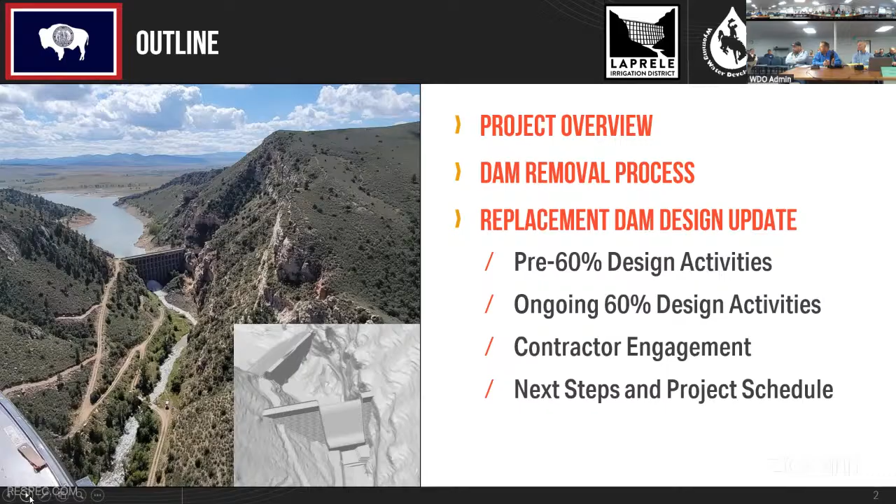For the overview, I hope everyone's aware we're talking about a reservoir just west of Douglas, just south of Ayres Natural Bridge Park, between Douglas and Casper. You can't see the reservoir from the interstate, but it's just inside that ridge south of the interstate as you travel from Douglas to Casper.

A little background on the dam for everyone's situational awareness: it's what's called an Ambursen-style slab and buttress dam. Construction was completed in 1909, so it's been around for a while. It's a large structure, with a crest height of about 135 feet, about 325 feet wide, and it stores 20,000 acre feet, which I think is the important number to remember as we talk about the replacement dam design.

It is a high hazard dam. In addition to potential significant infrastructure downstream, really the critical aspect is that there's a population at risk of about 500 people downstream of this dam. So safety is of the utmost concern when we're talking about the previous dam and as we design the new dam moving forward. It is a privately owned structure by the LaPrele Irrigation District, not a Bureau of Rec or other owned facility.

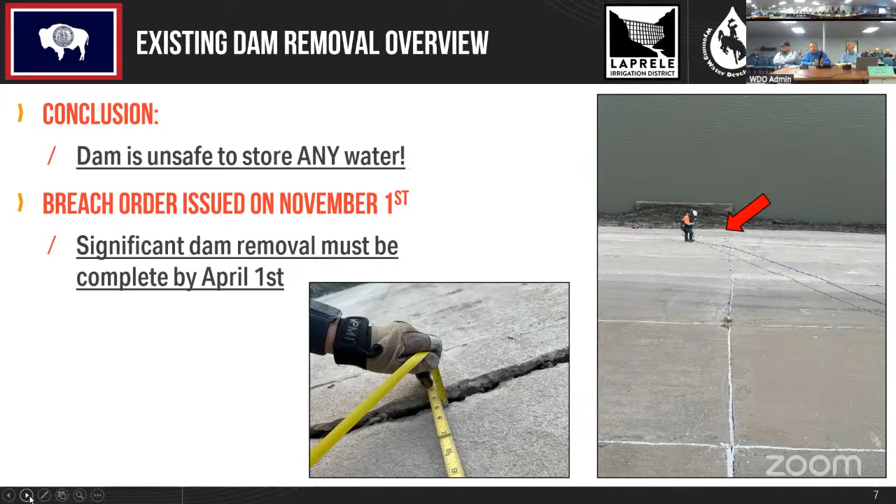That was then a lower elevation on the left half side of the dam to just route any high flows that overwhelm the outlet capacity through a channel over the existing structure. We left about 30 some feet of the existing dam in place, which corresponds to about the sediment level on the upstream side, because that was a concern to everybody - there is a tremendous amount of sediment in the existing reservoir.

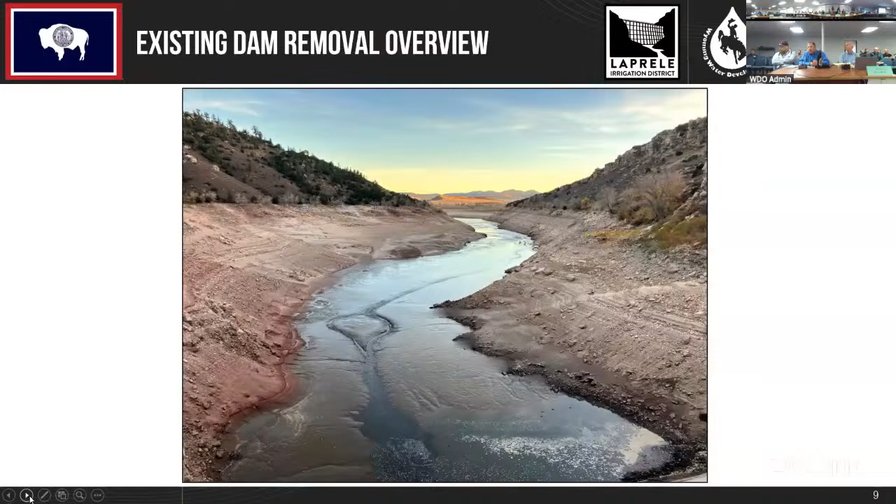It has been in place for over 100 years. So by leaving it at 30 feet, it left the amount of water on the upstream side of that structure at a minimum less than 50 acre feet. So it's not a regulated structure, but it gave us a plan and a path forward to keep the sediment in place as one of the primary goals.

Then we had to figure out who was going to remove the dam. In parallel with designing the removal process, we had to select a contractor. Ultimately, we selected a joint venture of Big Sky Civil Constructors and Montana Civil Contractors. Some of you may be aware of their work - they are currently the contractor building Leavitt Reservoir, another water development funded project. We signed the contract, the irrigation district signed that contract, I think about January 15th. So a lot of work happened between November 1st to get them on board mid-January.

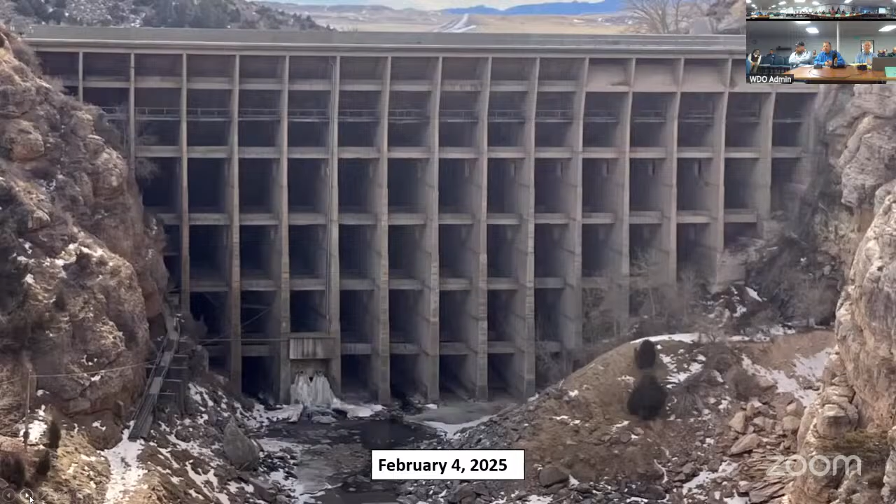We received the FONSI, finding of no significant impact, from the Bureau of Rec on January 31st. That was really the notice to proceed for the contractor to begin construction. So here's what the reservoir, the dam, looked like on February 4th, before they started any work - this is the original form with the kind of rubble pile there on the right.

Reached up with hydraulic shears and started chipping away on the buttresses. They also had jackhammer heads that they really used on the upstream slab, which was a lot stronger concrete than the 1909 concrete that was holding up the buttresses.

By February 23rd, in just a couple of weeks, they had removed enough of phase 1 to get to the upstream side of the dam, and that's where work really started to progress at a faster pace. They were not working from below the dam, but could be upstream and put downward pressure on that slab as they removed it. So the rest of my slides here are just a kind of time-lapse presentation where I'll show you the photo and the progress that's been made.

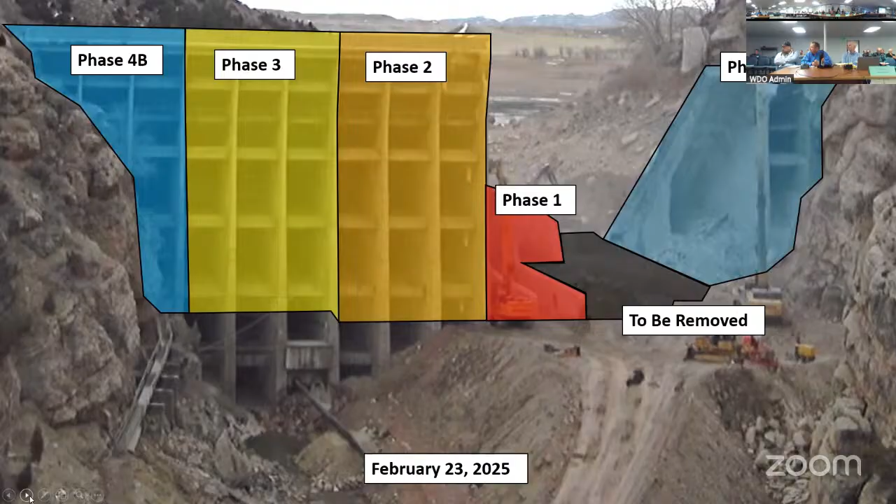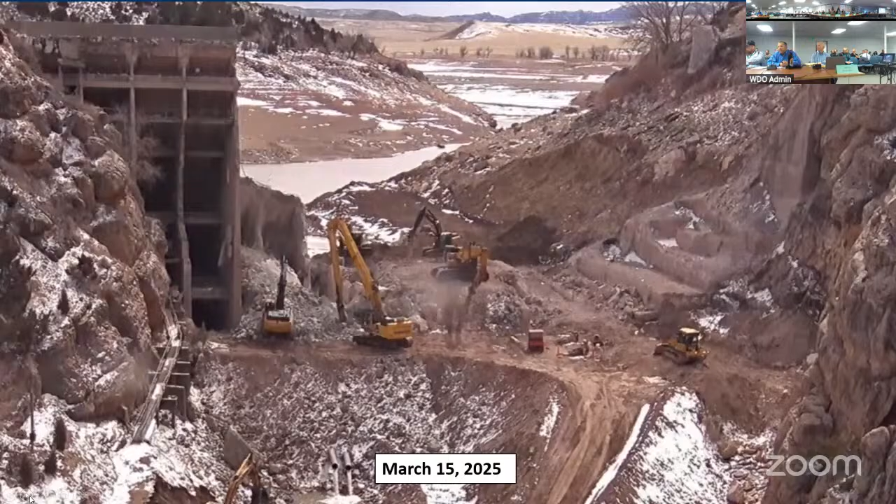March 15th, a couple of weeks before that April 1st due date. You can see they're continuing to move from left to right as you look downstream, into now they have started phase 3. And I should point out that things were going so well that while they were building their working pad across the downstream face of the dam, they went ahead and removed phase 4A, which is technically ahead of schedule, just to help their workflow.

At this point, they were down to final elevation. They just had to do the channel shaping, because the breach order said you had to be down to a certain elevation of removal for phases 1 and 2, but also required that the channel was shaped so you wouldn't be causing a lot of erosion or debris movement if a flood event occurred post April 1st. So by March 23rd, they really were focusing on the channel shaping.

And that's what the channel looks like now, through the existing structure, to route those larger flows in a way that has large enough cobble size that you won't get significant debris movement through that over the top of the remaining structure.

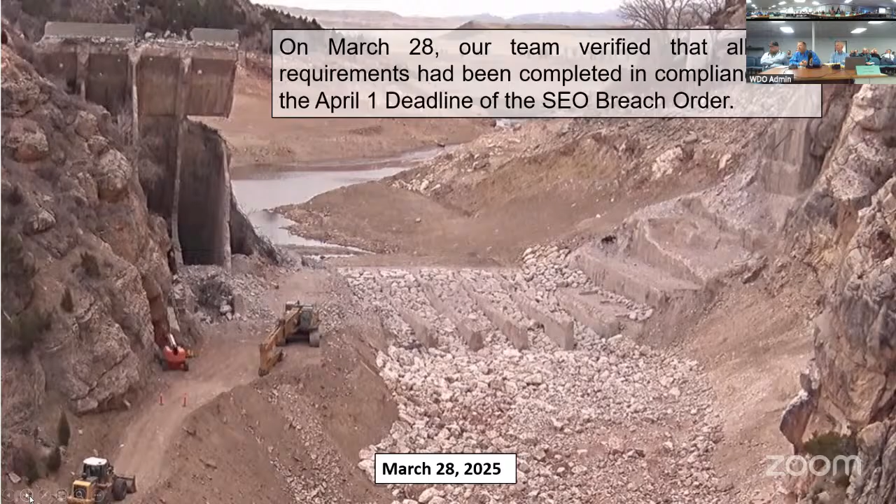So on March 28th, our team verified that all work requirements had been completed in compliance with the April 1st due date, that really the threat of a catastrophic dam failure had been removed.

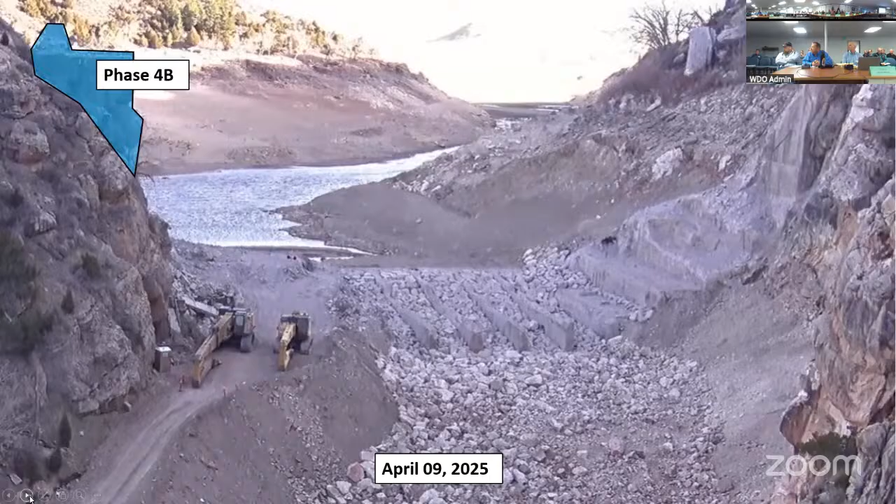By April 9th, then they're just cleaning up. At that point, they had just very little left of phase 4B right up in the corner. And that's what it looked like on April 28th. So at this point, construction has been essentially completed.

I think I have a little zoomed out photo there. You can see the existing outlet works have been buried. Those pipes have been extended and routed into the channel. As of today, all of the water going through LaPrele Creek are going through that existing outlet structure, and only higher flows would ever go up and over the spillway crest, now that we designed through that channel.

So on April 28th, our crews went out there and verified substantial completion for the contractor, and for all practical purposes, just a couple of little minor punch list items, cleaning up some remaining rebar that we were able to find around the site. But for all practical purposes, construction for the dam removal has been completed.

At this point, I'm going to switch to the new dam construction. Is there any questions on the dam removal process?

Chairman, I have a question with...

Dam removal. The new dam's going to sit in a different area, right? So you don't have to redo the structural integrity of the rock or anything.

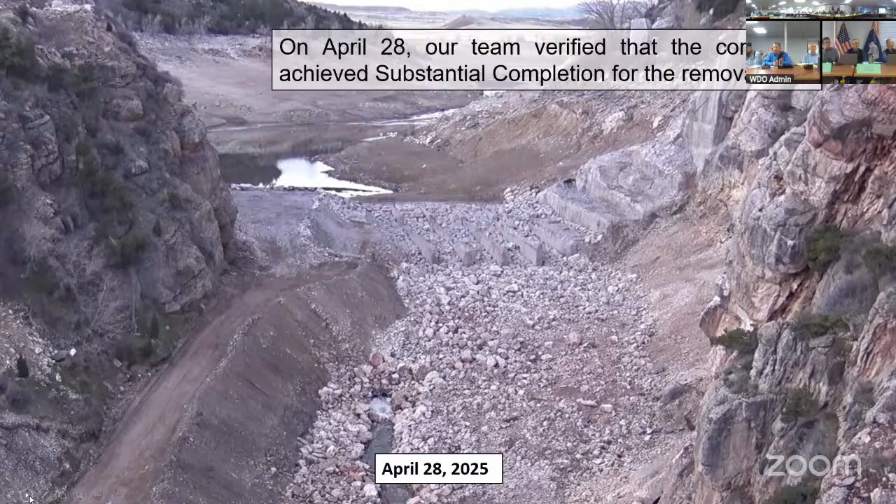Okay, thank you, Mr. Chairman. The replacement dam design update.

Just a quick overview of what we're trying to accomplish here. Remember, this replacement dam, as Commissioner Glick just asked about, will be immediately downstream of where the existing dam previously sat, as shown on the figure on the right. Obviously, it was a big change in our design and our plans for constructability that we'll no longer have, as shown here, the existing structure.

It's important to recognize that the new dam does not change the storage. The original dam was 20,000 acre feet. The new dam will be designed to hold 20,000 acre feet as well, and it is a sizable structure.

This dam was higher than the other one, 165 feet high at the top elevation, because modern dam safety standards say it has to meet and be able to pass the PMF, the probable maximum flood. And so that leads to an uncontrolled spillway width much larger than the spillway of the previous structure, 160 feet wide, as we follow best practices and the industry standard of care in designing the new structure moving forward.

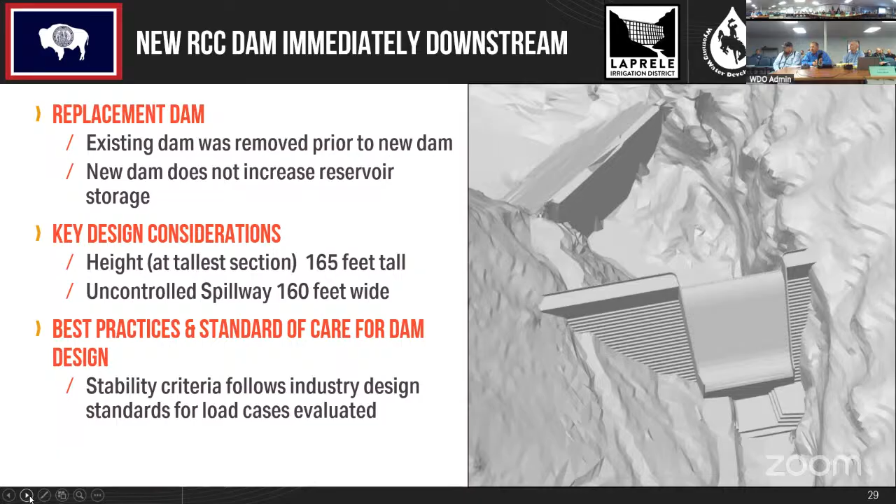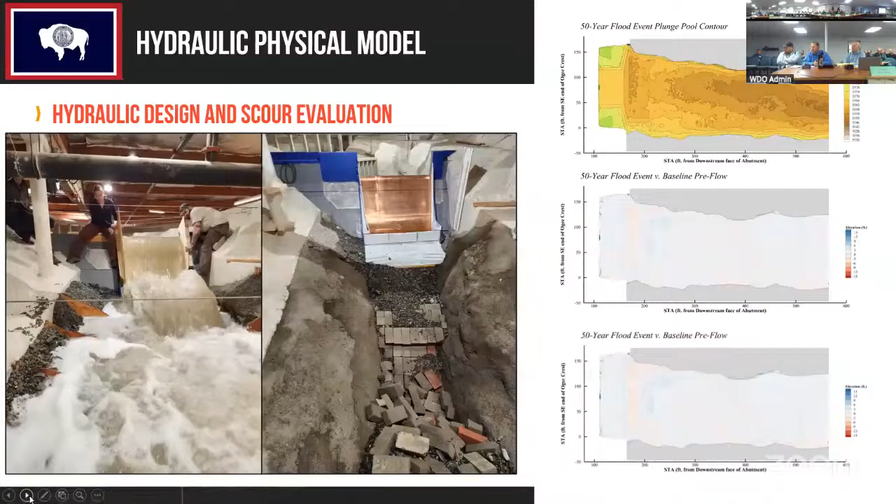We also, if you remember, created a physical model for the hydraulic design to design a flip bucket spillway and to evaluate scour potential downstream of the new dam with that flip bucket spillway, that's the figure on the right. That, along with structural modeling, really led us to the 30% design package that was submitted for review to the State Engineer's Office, Water Development Office, and others in 2024. That 30% design included the hydraulic modeling results, structural modeling, geotechnical foundation design, access roads, and the material sourcing at a 30% level.

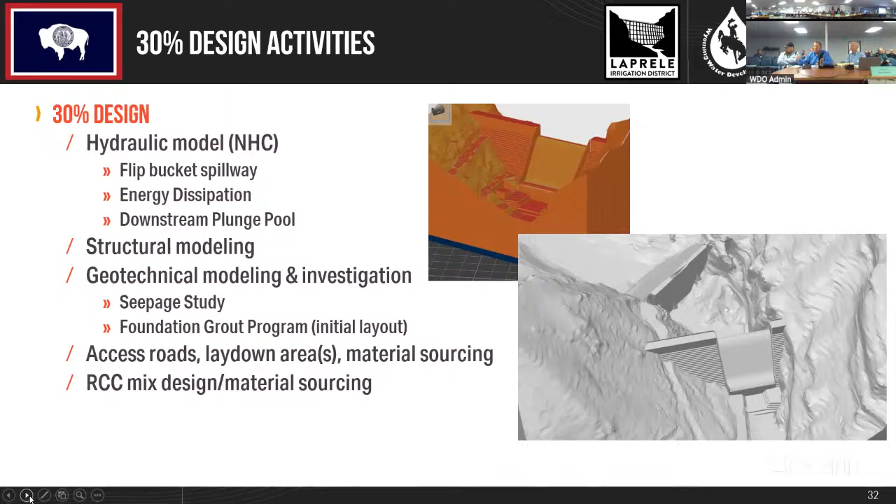So what we're really working on now is just advancing each one of these areas up to 60% and beyond. Very similar to the last slide, what are we working on today?

A lot of work has been done in recent months to advance the 60% design and create an interim design package that we submitted to the contractor, which I'll talk about in just a moment. The 60% design for geotechnical has really been essentially completed. On the screen here, I'm showing the excavation objective. It doesn't show very well, but we have the final surface, close to the final surface, of how much material has to be removed to build a new dam.

We're currently building the three-dimensional finite element model of the dam. That's the final level of structural modeling for stability and sliding potential, and we're engaged in active conversations around the outlet works, what valves to use, how they're configured, our power requirements, and so forth. We're also advancing the access road and mix design aspects of the dam.

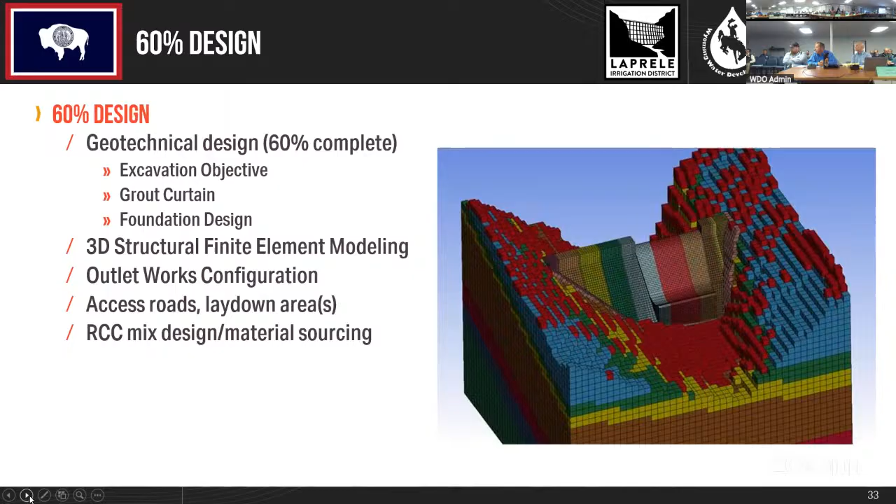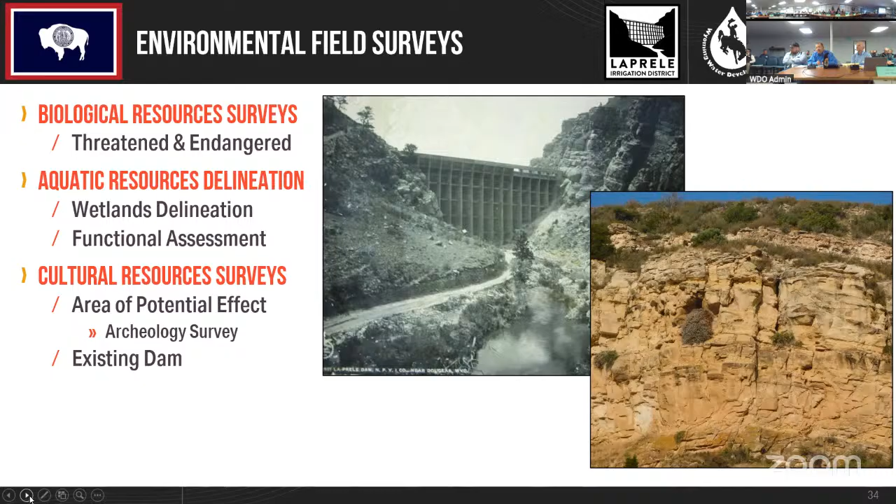The other thing not to lose sight of is there is an environmental process. The Bureau of Reclamation is the lead federal agency for this. In previous years, we've done considerable work, and believe we've completed almost all of the environmental field surveys, biological, aquatic resources, and cultural resources surveys to inform the environmental assessment document.

Prior to the dam removal, we had initiated the formal NEPA process with the Bureau of Rec, including monthly agency coordination meetings with them, the Corps of Engineers, DEQ, and others. Agency scoping letters had been sent, and the scoping process was complete prior to November of last year. The cultural report was submitted to SHPO, and we worked with them to decide whether to do a programmatic agreement or a memorandum of understanding. So we were working through all of those details, and working on the impact assessment, really writing and starting the environmental assessment document.

A lot of that got put on hold because we had to write a brand new environmental assessment for the dam removal. So we've reinitiated this process, and I'll talk more about that in just a minute.

One of the key activities of the new year, once we got the dam removal process underway, was that we had chosen to deliver this project with the CMAR project delivery method. CMAR is a collaborative project delivery method where the contractor is selected during the design phase.

So we initiated and went through that process earlier this year, and I believe signed a contract on April 7th. The reason you do this is because it gives you better informed early cost and schedule understanding working with that contractor. It's not just the engineer making estimates and guesses on what the contractor will bid and what their schedule will look like. We're actually working collaboratively with them to negotiate a guaranteed maximum price prior to completion of final design.

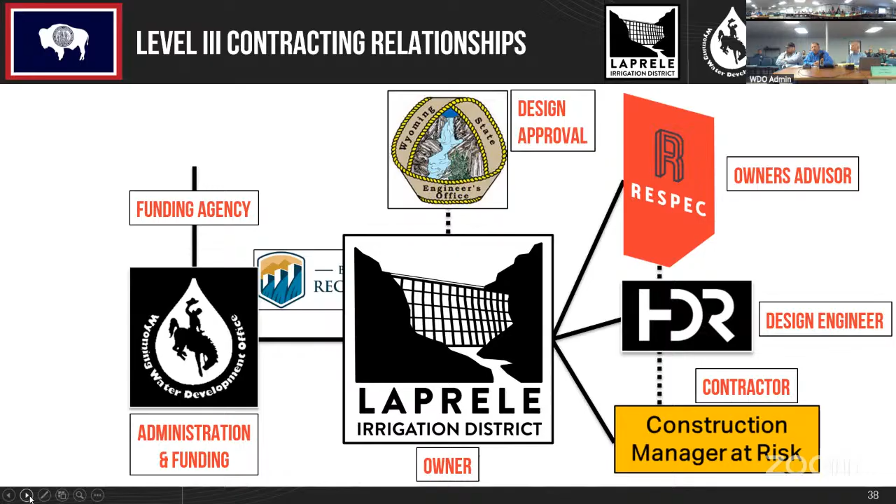As I already alluded to, earlier this month we selected the joint venture of Big Sky Civil and Montana Civil to be the CMAR moving forward. They are the ones that just recently completed the dam removal process, and are the same team currently building Leavitt Reservoir. They were absolutely outstanding to work with during the removal process, with a collaborative team that was easy for all of us to engage with on the design project. They came to us with an incredible proposal for their thoughts and plan for constructing the new dam. The Irrigation District made that decision in early March, and ultimately executed the contract on April 7th.

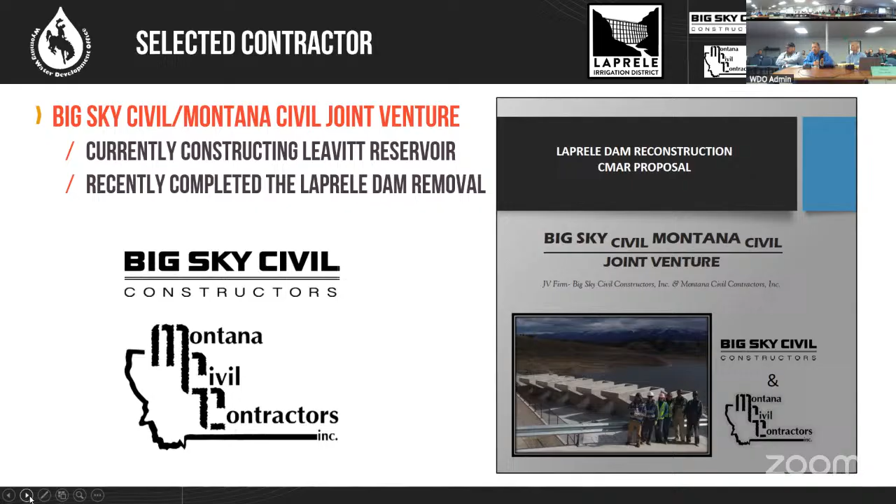Since April 7th, we got right to work with them. Candidly, their familiarity with the project meant they were able to get to work literally on day one. Honestly, they started working even before that, already creating their plan. By the time April 7th came, we were well underway with moving forward with this collaborative project delivery.

We started with the pre-award meeting in Douglas, introducing everybody to the team and setting goals for how we're going to work together. Then we had a design kickoff project meeting with the CMAR in Denver, which translated right into a design workshop for 3 days. Water Development, the State Engineer's Office, and others all participated in this workshop that happened in mid-April, really to start advancing the design with contractor input.

So what are the next steps and where are we at today? Well, one of the key first steps for the CMAR is to develop their first cut at the opinion of probable cost. They've already started that process and delivered a draft work breakdown structure of their construction process, which they submitted to us in draft form yesterday. We had a meeting reviewing that earlier today while I was driving down here. That will transition into their construction schedule and ultimately the construction sequencing, going right into their first cost estimate, which we expect sometime in June.

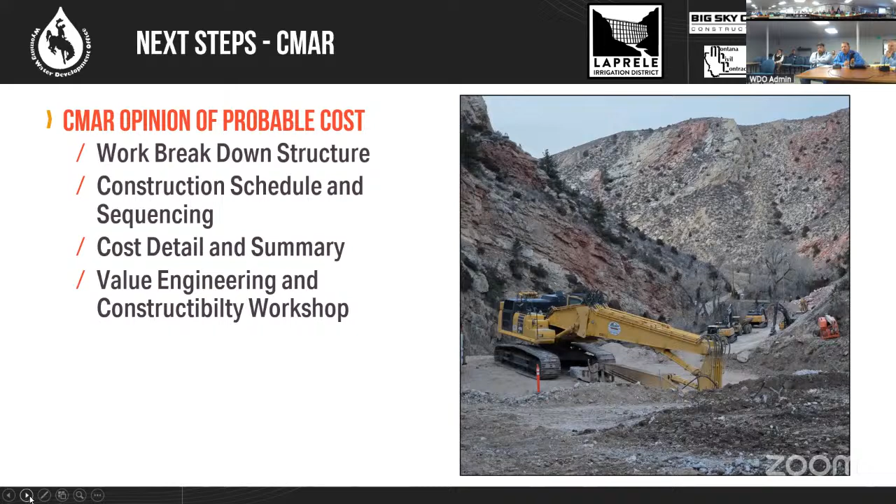We'll take that cost estimate and meet again in Denver in late August, early September to do another design workshop and a value engineering workshop. What do we like? What do we not like? What opportunities are there for cost savings? That will happen, like I said, in a couple months.

But more important, and probably the critical path item for this project right now, is the NEPA process. It went on hold with the dam removal, and we had to shift gears and do a whole separate environmental assessment document for the Bureau of Rec. Field work has already been completed. As I said, there might be a little bit of change now that we have CMAR input on where they want to put their conventional concrete batch plant.

But essentially, scoping has been completed. We are finalizing today the impact analysis and getting ready to submit an EA document, hopefully later this month, to the Bureau of Reclamation, which starts about a 4-month window with public comment and agency review, two different agency review periods in there. We're targeting and hoping to have a FONSI sometime late September, early October to be able to do early work packages if so desired for the contractor, and if it helps advance the construction schedule.

So that was really step one for the contractor. They had to give us their plan for construction so we had all of the impacts properly described in the environmental assessment document. So that's what we're working on right now.

In conjunction with this, we are continuing to work on right-of-way and securing easements. We're well ahead of that process. There are really two access options for the dam: coming through the existing access to the dam from the north, where all of the easements have been secured, and we're currently working and communicating with landowners to come in from the south, which is our plan for delivering aggregate to the roller compacted concrete batch plant.

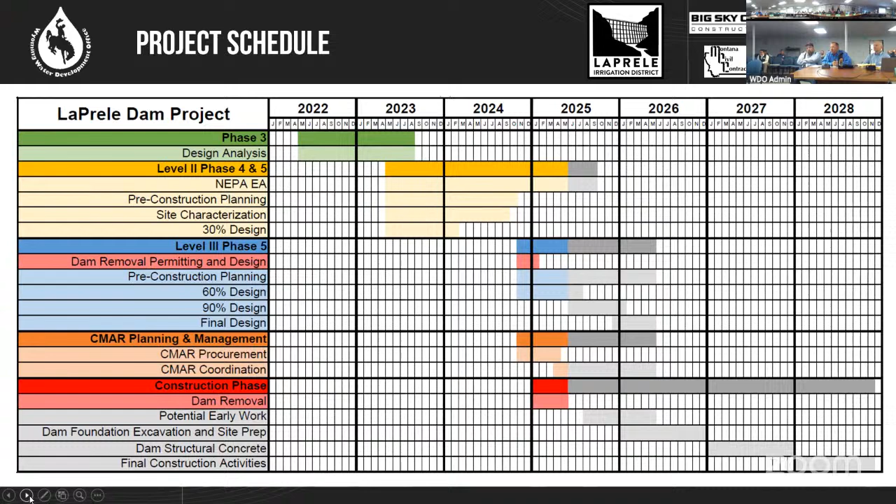And with that, I'd take any questions.

Have questions for Corey or Casey? John? David, can I talk through this computer?

So, can you hear me? Let me try this. I can't. Sorry, I don't remember this room being so small. Can you hear me now?

The question I've got is will the dam capacity be back to what it was in 1909, compensating for the capacity you've lost because of sediment, I presume?

Mr. Chairman, Representative Eklund, we're designing the new dam to account for any loss from sedimentation. We did a new bathymetric survey of the reservoir two or three years ago, and that is the basis of our volume calculation. So we are designing the new dam to be right at 20,000 acre feet, again to account for any lost storage through sedimentation in the past.

Okay, that's what the original reservoir was. Okay, thank you.

So I guess our overall agenda here: do a little bit of project background. I know some of you are pretty aware of our project, but for some of the newer people, we'll do a little project background, project overview, cost and schedule, and then of course question and answer.

First of all, project background. Goshen Irrigation District diverts water from Whalen Diversion off the North Platte River, about 4 miles from Guernsey. We have 3 major siphons on our system that our whole canal runs through. We have some other open canal laterals, about 3 major canal laterals that are about 60 miles long. Our main canal is 85 miles from Whalen Diversion to the state line of Nebraska, where we are responsible for delivering water to Gering-Fort Laramie Irrigation District. So they're a stakeholder in this as well.

And of course, we have 2 half-mile long tunnels in our district. Tunnel 2 is the one that had the collapse and failure. There's also a mile-long tunnel in Nebraska on the Gering-Fort Laramie Canal.

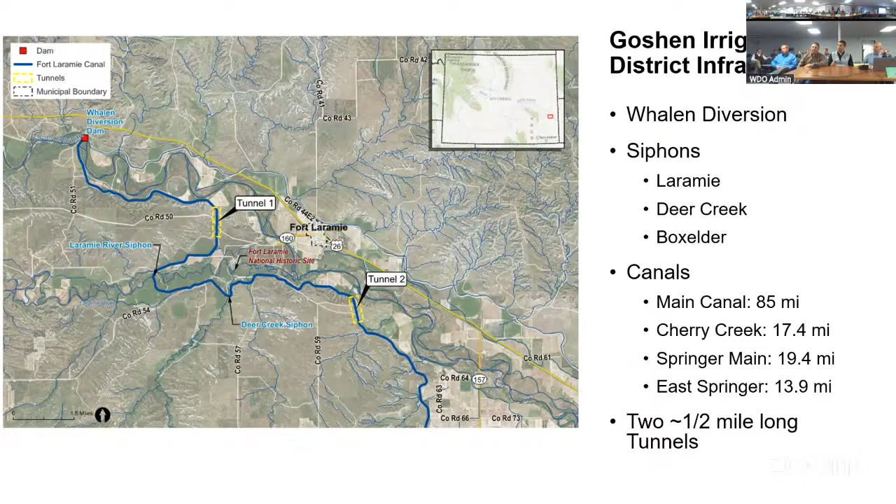When the collapse happened, July 17, 2019, in the middle of the night, we have SCADA nearby that alarmed us that the canal had a high level, and then not too long after that, an alarm that said we had a low level in our canal, so we knew that the canal was probably breached. We called personnel up right away. We were on scene within about 45 minutes to an hour, which is about how long it takes to get up to Whalen and the Tunnel 2 area. But we had shut water off by 3 a.m. when we realized there was a collapse and a breach in the canal. So pretty short period of time to get things shut down.

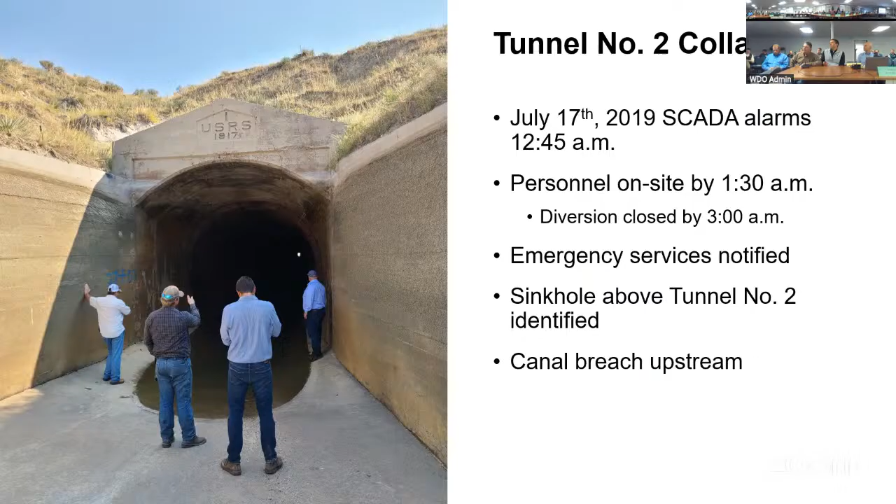We were running not full capacity, but a pretty full canal at that point, so it took a little while for the water to drain out. We notified emergency services of what happened, and found out that we had a large sinkhole above Tunnel 2. So we realized that the tunnel had indeed collapsed.

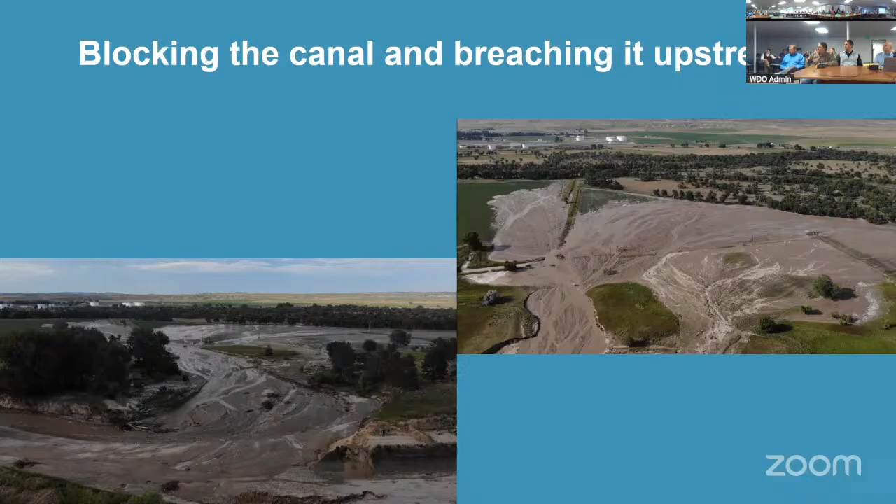Here's kind of what we did with the tunnel collapse to get it mitigated and back into use. Engineers looked at the tunnels and found spots of concern. Where the collapse was, once we got the dirt out of the way, we installed 6-inch steel beams to help support the tunnel. This took roughly 6 weeks to fix the canal collapse before we were able to restore water.

The University of Nebraska and University of Wyoming did a joint economic impact study and came up with a $90 million impact of the crop damages that those 6 weeks without water caused. We were then able to restore water in August and ran for the rest of the season.

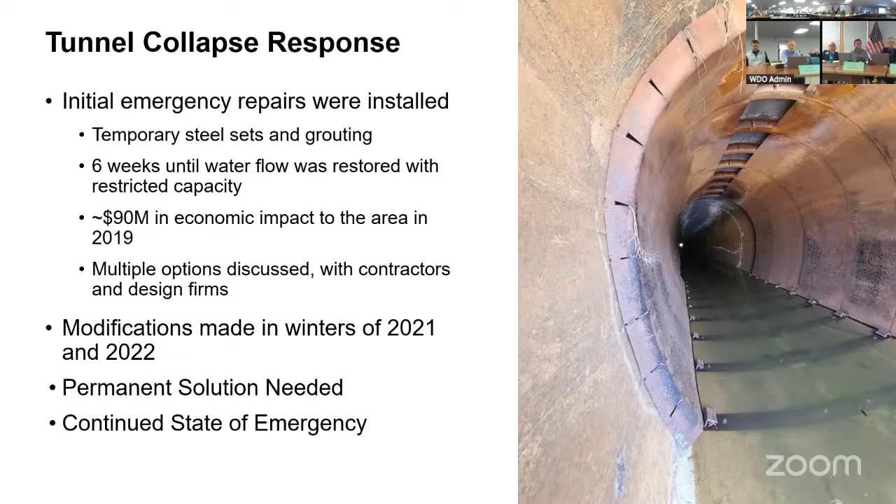Then we started working on what our permanent solution for this would be. This was always just, we say, a Band-Aid fix. We still feel it's an emergency - those steel sets are taking on load, and we still aren't able to deliver at full capacity. So our urgency is still there to get this project completed. I think with that, I will turn it over to Marcus.

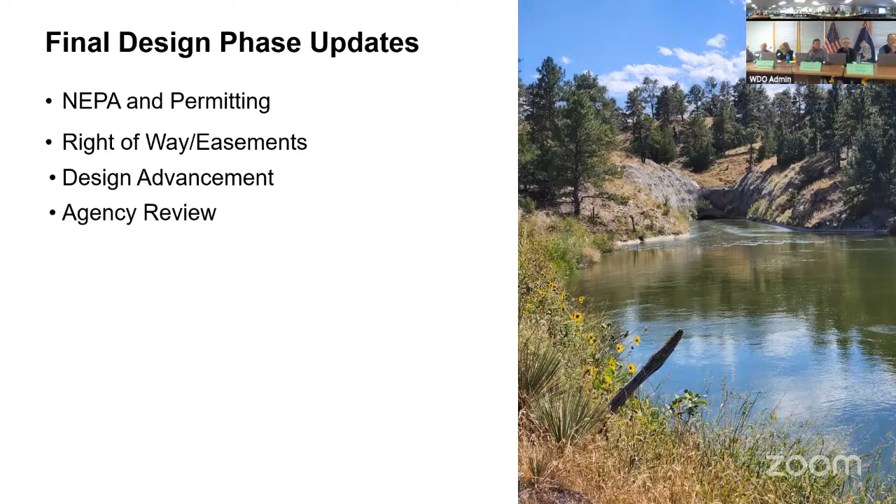For those who may not be aware, NEPA is the National Environmental Policy Act. It's required anytime there's a federal nexus, which we have here because the Bureau of Reclamation owns these tunnels. They acted as lead agency for the NEPA, which was an environmental assessment that's been through draft phase and public comment. We've addressed those comments and sent back what we believe is a final compliant document to Reclamation. We were hopeful that bullet would be a checkbox today instead, because we feel any day now, based on email correspondence with Reclamation, we anticipate a FONSI, but haven't seen it yet.

The BLM is also involved as a cooperating agency. We're hopeful, though we obviously don't speak for them, but they've been involved in the process, and we anticipate their FONSI would follow closely behind Reclamation's.

Regarding project right-of-way, a lot of great progress has been made. All private right-of-way needed for construction has been secured, and we've also secured a significant amount of state land for temporary staging and easements. The BLM lands, knock on wood, we anticipate would be granted following issuance of their FONSI.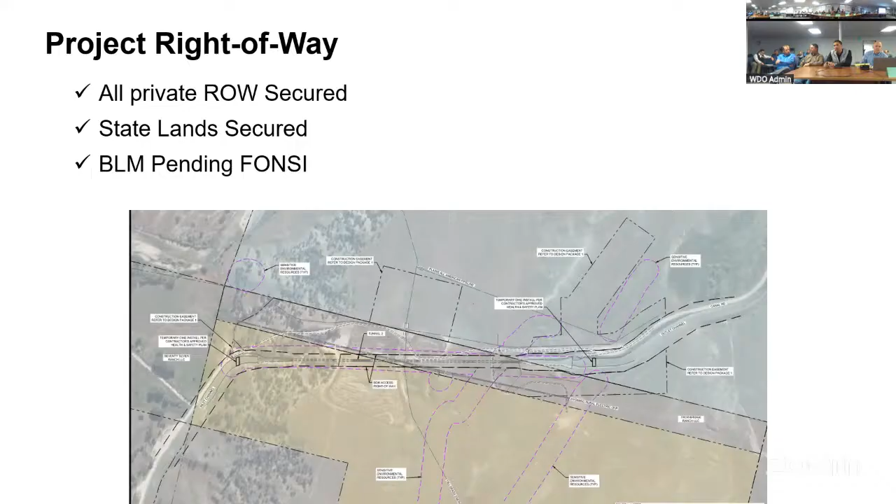A quick overview of the CMAR process mentioned during the last presentation: construction manager at risk really means early contractor involvement, and that's the delivery model used here for Goshen. The CMAR for this project is Atkinson Construction, a tunneling contractor.

So what is our approach to rehabbing this tunnel? Through value engineering work in collaboration with the CMAR, the methodology has changed some. I believe we presented this in November, but we have more detail now. What we're proposing involves use of an open face tunnel boring machine, which we call a digger shield. That machine is cylindrical, and would ride on the existing tunnel inverts, completely removing the tunnel crown and sides, making this a full rehabilitation of the tunnel.

We think this has real advantages for this type of ground, because the excavation and personnel operations are fully enclosed, and the ground is supported as you advance. Previous pictures showed history's tendency for running ground here. Since then, a lot of grout has been injected into the tunnels, and we'll inject more before this operation takes place. But the digger shield really helps mitigate those ground risks. It's also a high quality product, since the tunnel assembled behind it uses precast concrete segments joined together, fastened, and grouted into place. Because of that, we're able to procure those segments in advance, getting a high quality concrete product cast in a controlled environment, with grade control, and ultimately satisfied hydraulic capacity.

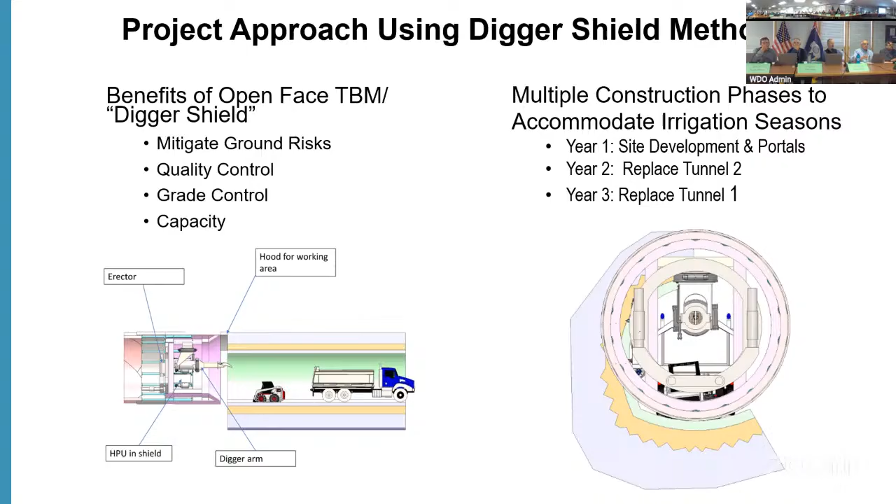Just a little bit more on the site work here. Some minor road improvements would be needed to bring in this equipment, just typical construction preparation, staging areas and such. The portals again would be reconfigured to launch and receive the machines, and we need to bring site power down.

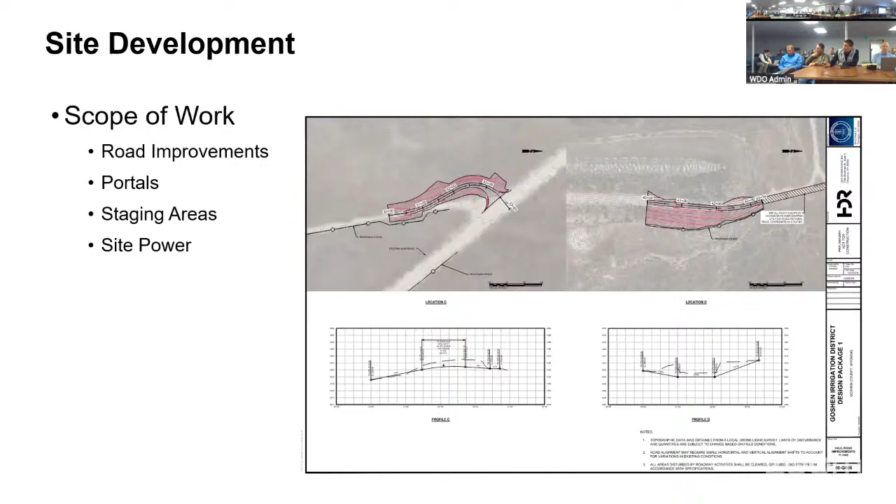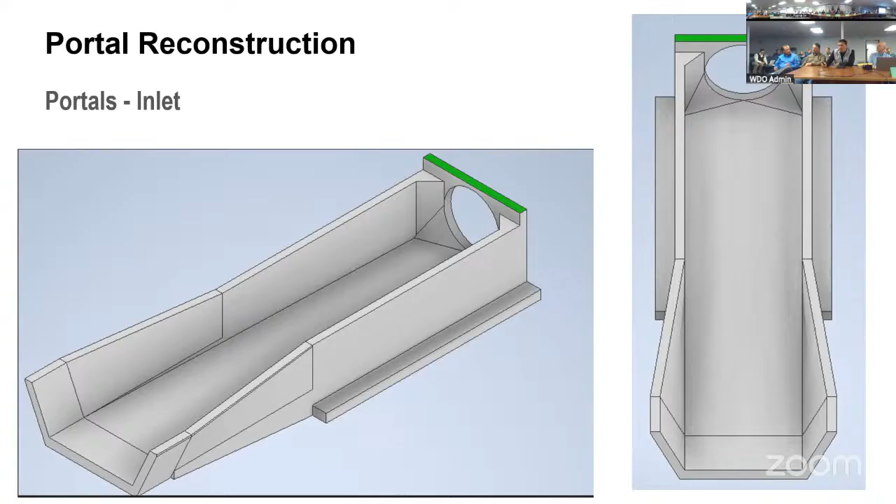Just some more renderings here showing the inlet side. For value engineering, we want to limit the scope of that to what's necessary and needed to facilitate the rehabilitation of the tunnels.

Now the outlet. The big question obviously is on size, what is the diameter? Just wanted to communicate that here. The existing tunnels are a modified horseshoe shape. They would be replaced with a circular shape, an 18-foot internal diameter, so there would be adequate capacity. That would be set on the existing invert, so there's a slight invert rise for the flow line of the tunnel.

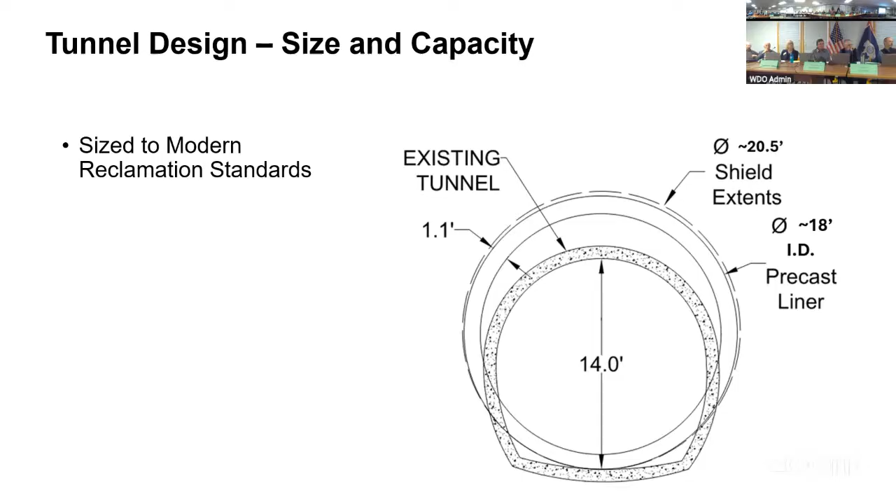Just a little bit more of the activity is shown here in this schematic of what we'd anticipate. The digger shield will advance, and the working face there is removing the tunnel. I don't think that's fully to scale.

We don't anticipate tandem trucks in there, but we do have a nice advantage in that we can muck material out the front of the tunnel, and that's going to help with production rates. Obviously, a lot of tunneling doesn't have that luxury — you're mining into virgin ground, you've got to muck material behind you and bring in your new tunnel. So here we have that benefit that should help with production rates.

And again, we have to do this in the off season of irrigation. We recognize fully that impacting water deliveries is not an option, and so that should help with that.

The backup decks and some of that erector equipment on the back end, that's the trailing end. The machine jacks off of the segments that were installed and erects new segments behind it. There's either a telescoping or a temporary support system, working with the manufacturer, the likely manufacturer, on that right now. As the ground is mined out, those temporary supports can be advanced even further in advance of the tunnel, always doing what we can to mitigate those risks.

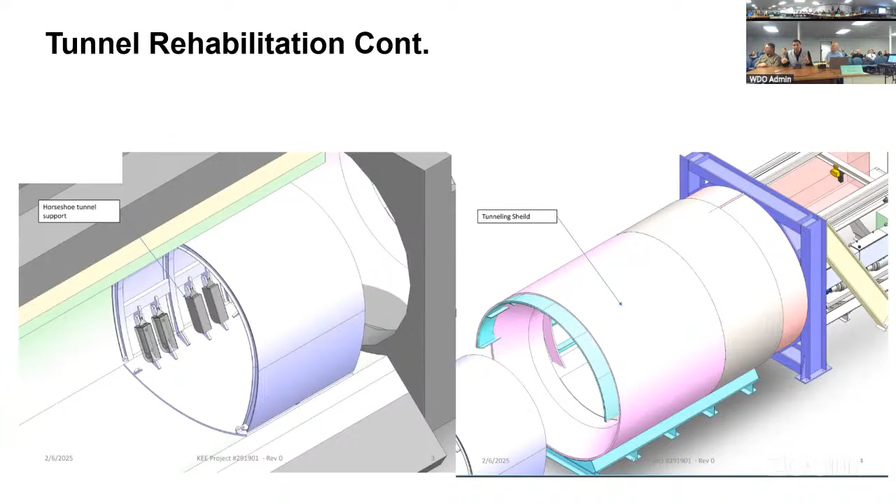Just another schematic view, more than schematic, of the digger shield. These pictures are examples — they are not the digger shield for Goshen, but give you a good life-size view of what these machines look like. The different tooling I would call to your attention on the front end: that working tooling can be that road header type, you can grind through rock and different materials, or you can fit that with a bucket, potentially changing those out as you go to match the ground.

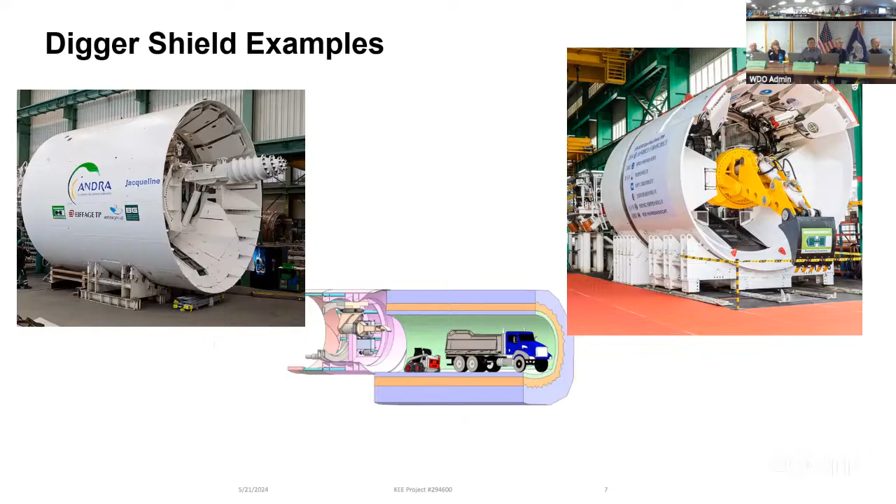A little bit more on the proposed schedule. The GMP proposal will be given to the boards at their next meeting here in May. From there it's the board's decision, potentially to execute in June. What we want to do is put the boards in a position where they can decide to either start procuring some materials or not.

This summer's got a lot of big decisions ahead of us. We're going to work through the office and make sure we're making smart choices there, but some of this equipment's going to take some time. Really, if we're going to meet the construction schedule for the tunnels, we're looking at a year lead time for some of these segments and the machines. So those decision points are coming soon. We want to have the NEPA right-of-way and the costs understood in order to allow smart decisions to be made.

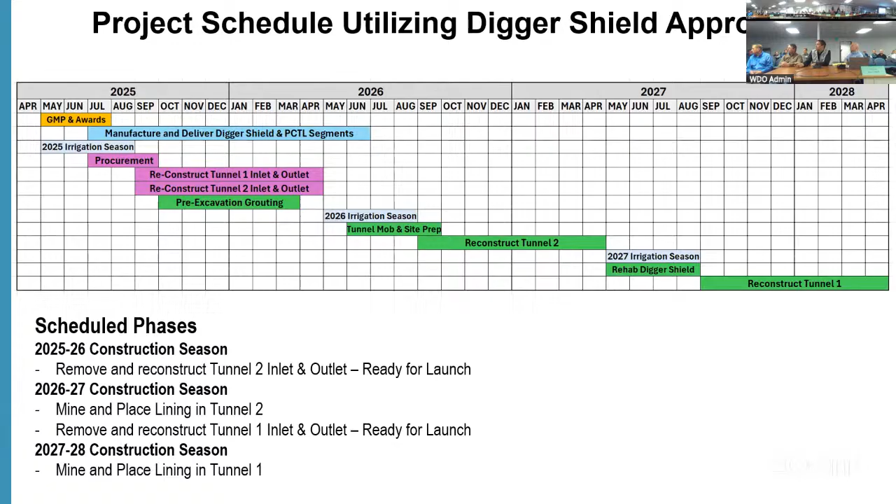Because this is a reclamation-owned facility, in order for the districts to have the opportunity to draw upon a potential loan from reclamation, we had to go through what's called their directives and standards process. We plan to have that buttoned up in time for construction. Ultimately it's required. So what we've already been through is value planning and engineering. We're resolving what they call their design, estimating, and construction process, or DEC, and the 90% review process will need to be addressed here shortly as well.

As Marcus mentioned, we are working with the CMAR, the contractor for this, and expect to have an updated cost estimate and a full GMP proposal next week at the board. So everything I talk about is a little bit speculative based on the work and interactions we've had with them for the last several months, but we're getting closer, so nothing is exact. We don't have final answers. We'll know more after next week's board meeting.

We've been working with them now for about a year. We got an initial cost estimate from them in November, and we got what we're referring to here as the current cost estimate from them in January. The first current proposed estimate from them, the first proposed GMP so to speak, came in higher than what we had anticipated or expected, at about $130 million.

So we've been working with them leading up to next week's submission of their next proposal to try to identify if there are any potential cost savings. I believe we've successfully worked with them through a value engineering process to find some things: removing the risk from potential subcontracting requirements of them not being able to self-perform critical aspects of the work, really focusing on who's going to do the work, working on the construction scheduling. We believe that's going to lead to about a $10 million cost savings.

We're going to try to work with local contractors and bid out the portal work and the site work outside of the tunnels. We believe that will lead to potential cost savings on the order of, we hope, about $5 million. So there's a potential cost savings there.

Any questions? Any questions? Mr. Chairman, Dan Larson here. Yes, Dan, thank you.

Obviously we can all see that Nebraska has a bit of a shortfall if they're trying to match the 51%, or whatever, 49%. So is Nebraska talking about upping that, or what's up?

Yes, Mr. Chairman. Currently the Nebraska state legislature is in session, and they've been meeting with them regularly, and so far the answer has been no. Nebraska is carrying a deficit in their budget right now, so they aren't too willing to give out any more grant money.

But they have been talking with the Bureau of Reclamation about whether we need to utilize all of our 49% of that XM loan, or if maybe they could take on more of that loan or increase the loan amount. So that's kind of where we're at right now. Nebraska's stance, I'm told, is that if they don't have enough money for both tunnels, then we just do one tunnel and look for further funding and go from there. Unfortunately that would delay things even longer, but that's where they're at right now, from what I know.

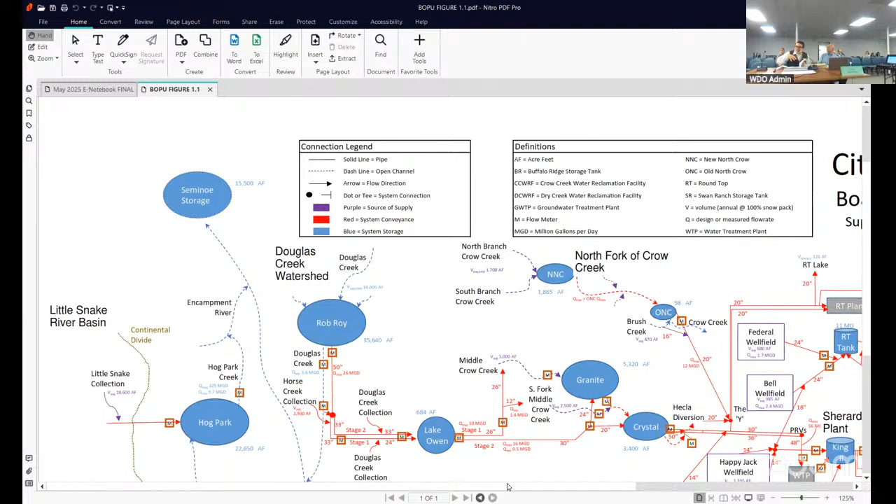This is a pretty good diagram to capture that, starting on the left side of the page. Generally speaking, the western side of the Cheyenne system, you see the little snake diversions. It talks about and depicts how those water transfers occur across the basin, how that's accounted for in Rob Roy, transfers across the Laramie Basin, and then shows up in Granite and Crystal reservoirs.

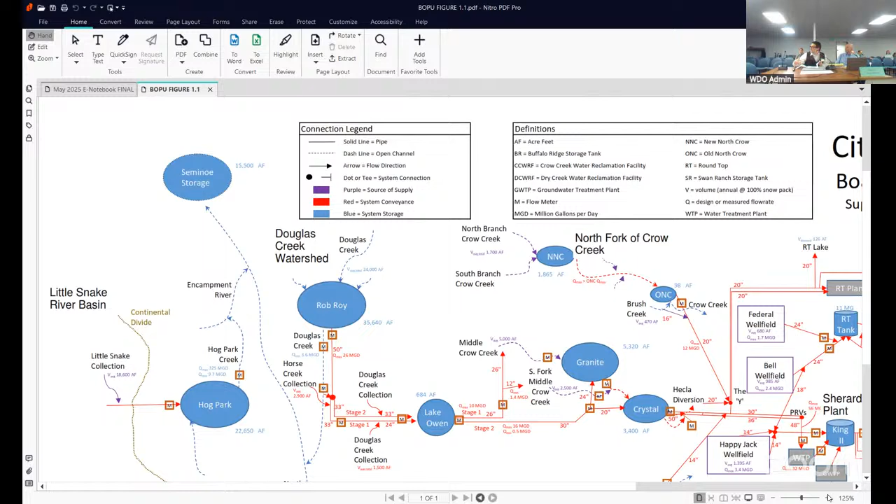For our discussion today, the series of depictions on the following pages will be focusing on that Crystal Reservoir area. In particular, we'll be looking at the area between Crystal Reservoir and what's called the Sherard Plant on figure 1-1.

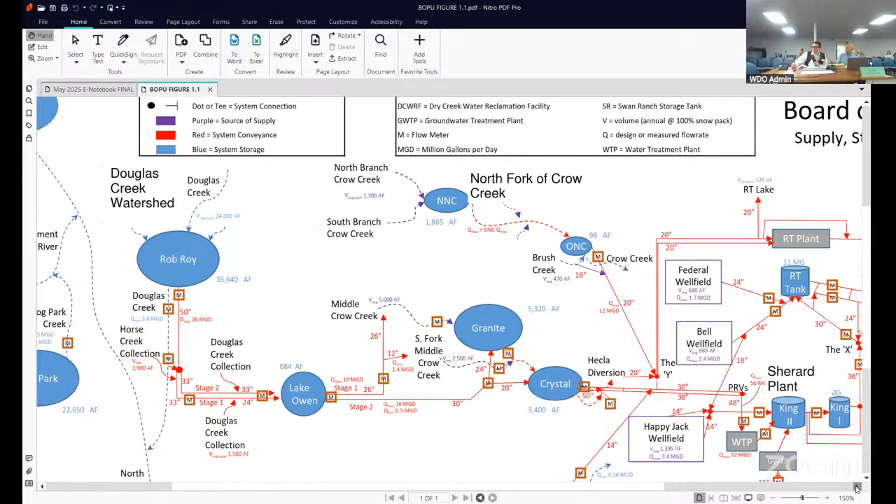Obviously there are more details downstream of Sherard, but when we get to the ultimate project proposal, it's really going to be right downstream of Crystal. So the details of the infrastructure downstream from there are probably not particularly relevant.

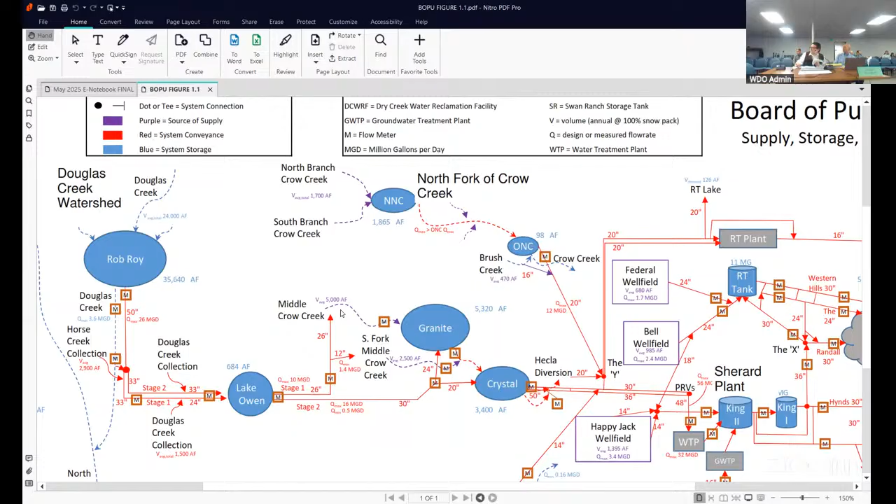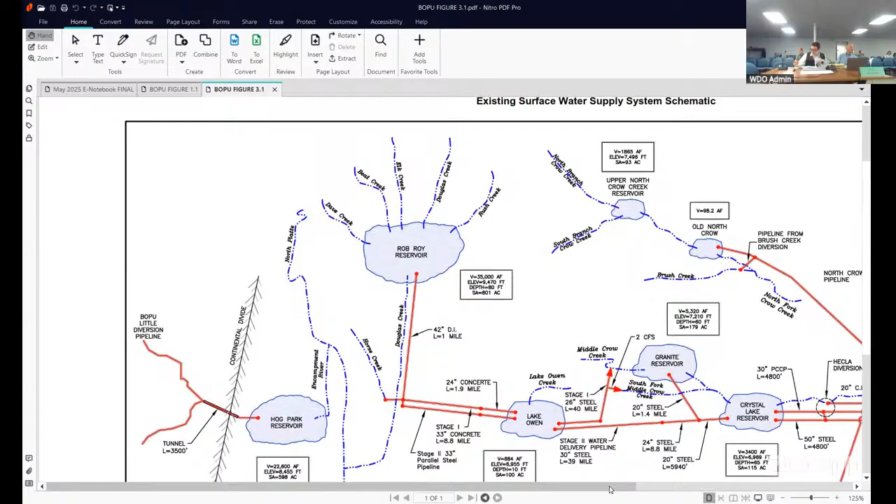So you start to see this depiction of a 50-inch steel, a 30-inch steel, a 36-inch steel. Those are the areas we will be honing in on even more closely.

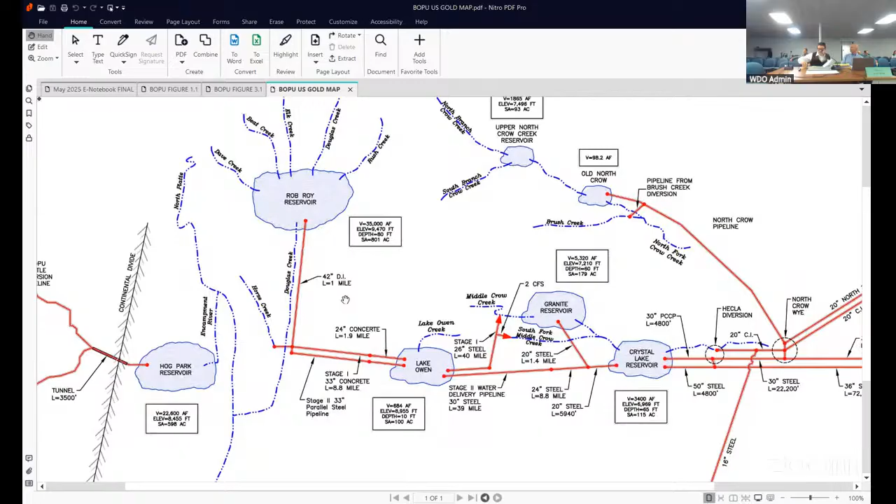Then the third page of this is titled Potential U.S. Gold Pump Station. This two-panel figure was prepared by Board of Public Utilities, and ultimately, after I finish exhausting all the wind I have available, the BOPU folks are available in the audience and can come up and answer any questions you might have more specifically.

But the two panels really start getting into what we're talking about. The panel on the left shows Crystal Reservoir and also contains a depiction of, quote, approximate mine location. In the case of this project, the Board of Public Utilities has been approached by a user, and they are looking to purchase water. That purchase would require some pipeline connection, pump station interconnect, and it ties in with a little bit of infrastructure that the Water Development Commission has funded over time.

So we'll talk a little bit more about the right side panel. On the right side, what you'll see is a 30-inch raw water line, 20-inch raw water line, and 36-inch raw water line. For our purposes, really what we will be talking about is the 30-inch and the 36-inch. The 20-inch raw water line doesn't really meaningfully connect to the base of Crystal Reservoir.

So what I'm hoping to do is fixate your interest on that 30-inch and the 36-inch, and see how the proposed pump station connects to the 30-inch line and provides water back through and to the South Crow pipeline. The real nuanced piece of this is that obviously Board of Public Utilities has participated in a lot of water projects with the state and with the commission over time.

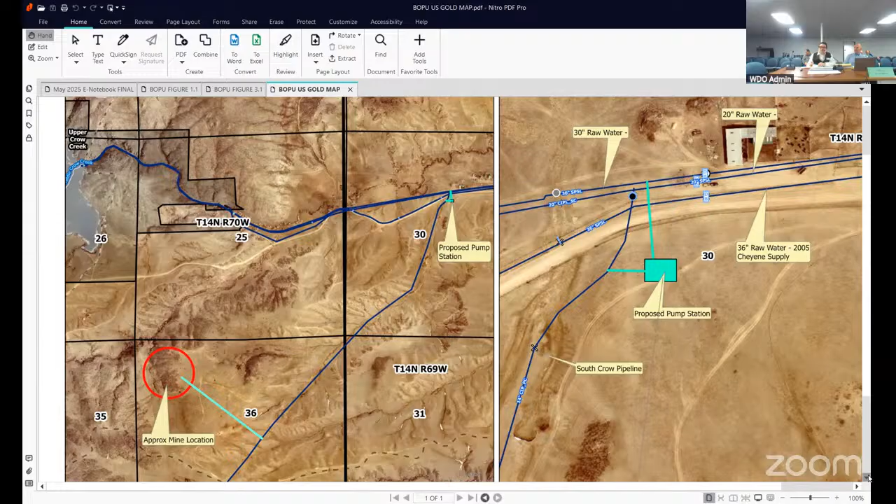That is about as fast as I can get through that nuanced discussion. So the things the office is looking for discussion on are, one, are we thinking about this all wrong and should we think about it differently? And two, an approach to, if that's feasible and realistic, how would we go about figuring out when Board of Public Utilities has exceeded that 21 million gallons per day?

Our thought operationally at this point is that we would probably prepare some correspondence to Board of Public Utilities and ask them on an annual basis to report back to the commission and let us know their peak day, by which we could determine whether they needed to share in water sales proceeds or not. I can answer any questions the commission might have, or entertain discussion if you'd like further information about the background on the agreement. Also, Frank Strong and Brad Brooks from the Board of Public Utilities are here if you have questions more related to Board of Public Utilities operation.

Are there questions for George? Thoughts, Commissioner?

Thanks for the presentation, George. So what would be the amount - say they hit over that amount, do we tell them how much to contract with for the sale of water, or is it a predetermined amount? Maybe that's a question for the city or Frank. But is that something they get to decide, or is it always a set fee? How does that work?

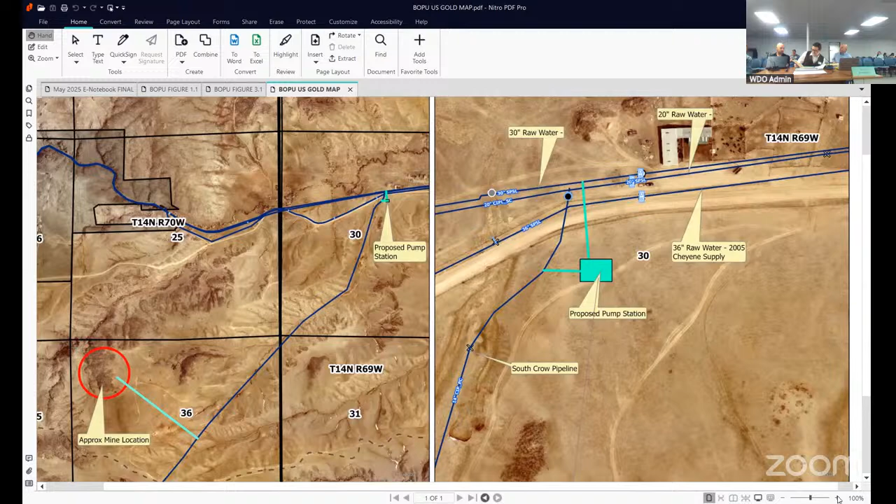Mr. Chair, it might be helpful to look back at that third figure that was provided, the so-called potential U.S. Gold pump station. The right panel shows a number of pipelines and a proposed pump station that would accommodate this project. That proposed pump station shows piping that would connect to what's labeled as a 30-inch raw water line, and then pumping that into a South Crow pipeline. To be clear, the Water Development Commission did not participate in building that 30-inch raw water line. In fact, the project we've talked about is the pipe labeled 36-inch raw water. So, from strictly an infrastructure standpoint, the connection is not going to be to a pipeline that the Water Development Commission participated in project funding on.

Thank you, George. Senator Larson, does that provide clarification? I guess turn the 36-inch off then.

Mr. Chairman? This is Gary Crum for the folks on the video. My question is, why is it going out of the 30-inch versus the 36? It seems to me the 36-inch would be closer and cost less for the infrastructure to go there. Why is it going that way?

Mr. Chair, through you, it was to create this discussion. There were lots of options. We've been talking with US Gold about different opportunities, and we said we could tie to the 36-inch, or we could tie to the 30, depending how we want to do it. But we need to have this discussion with water development. So I merely drew it that way just to create the discussion, nothing is set in stone. And I would add, we definitely tied it to the 30-inch because of that issue. But then we brought it to water development to say, okay, we're planning on going to the 30 because there was no participation in that. But how do you guys see this operationally working out? So to be very upfront, yeah.

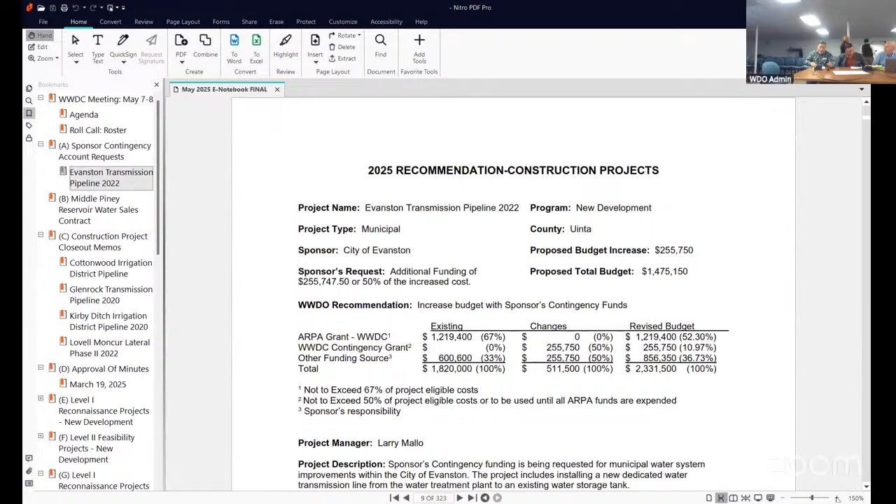Okay, thank you. Just to do a high level, the Commission is pretty familiar with the Sponsors Contingency Fund. We have quite a few new Select Water members. There are three different sponsors contingency funds for each of the accounts, so there's account 1, account 2, and account 3 sponsors contingency. These funds are set aside in the legislation when we get a project that comes in slightly over budget, so that the commission has these funds available to adjust that budget. And as mentioned earlier, delaying projects generally just increases the costs.

So the purpose of these accounts is to allow the commission, when we come in slightly over budget, to award additional funds to that project and keep it moving so we do not delay it. Generally rebidding projects, even when we cut quite a bit out and rebid it, they still seem to come in higher than the original bid. So that's the purpose of this. In this case, there's a couple different issues that went on.

I should throw out, this will be an account 1 sponsors contingency. I'll get exact numbers tomorrow. Tomorrow we will actually vote on this. Right now it's just informational to get you through most of the questions. I believe there's about 5 million in this account. I'll have an exact number, but Jason says 5 million is pretty close, and I'll have an exact number tomorrow before we vote on this.

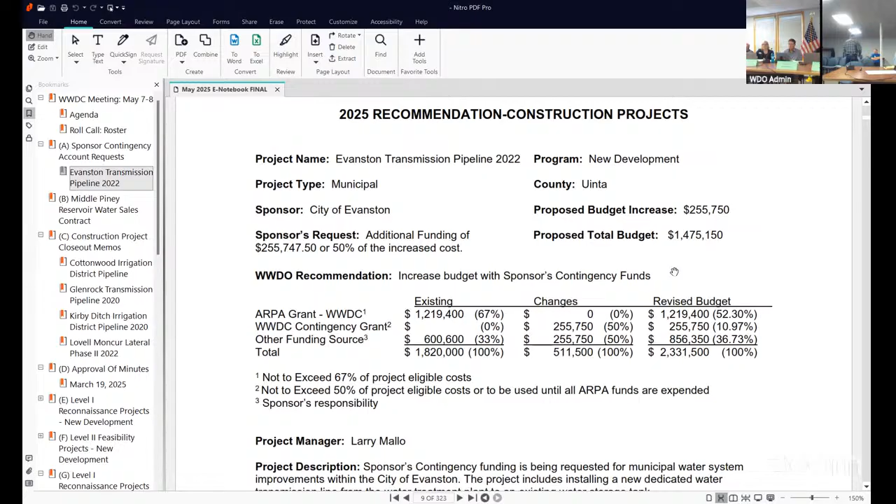Okay, Director, the Middle Piney Reservoir water sales contract. Okay, so I'll try to be as brief as possible here.

So Middle Piney Reservoir is out west of Big Piney, Wyoming, about 30 miles up in the Bridger-Teton National Forest. We've been working with both what is now the Middle Piney Watershed Improvement District, the landowners and irrigators over in that valley who would stand to benefit from this project. I should say I have Chad Espenscheid, a member and representative of the Watershed Improvement District, joining us online if you have any questions for him.

Over the past, I think we started reconstruction of this in 2018. We're at elevation 8,800 feet, so the construction seasons are very short, but we are finishing that up. It's finished up. We started filling for the first time last year, provided some water to the irrigators last year, kind of in an experimental standpoint. They didn't go into regulation. I think they're pretty used to going into regulation, so they were very happy with that.

The intent all along has been, once we get this reconstructed, it's owned by the Forest Service because it's on Forest Service property. It was originally a privately developed dam from about 1900 to 1930, and it took them quite a few years to get it built. It's got a 1919 water right, so it's pre-Colorado River compact, since it's in a Colorado River tributary. The compact is 1922, so it's something the state is interested and always has been in reconstructing.

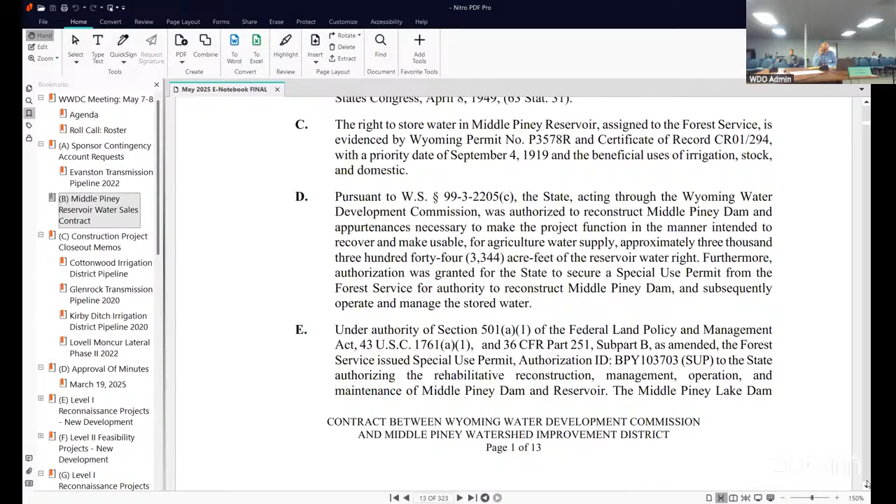The Forest Service required the state to be the applicant and holder of that special use permit instead of the Middle Piney Watershed Improvement District. That special use permit also has an operation and maintenance manual that was put together by the engineers that completed the design, as well as the emergency action plan associated with the dam.

If there were ever any issues with seepage or overtopping, that's the plan you implement to make sure you're evacuating folks downstream, because it is above the town of Big Piney. So all of that—the O&M manual, which would need to be followed by the Middle Piney Watershed Improvement District—is contained by reference in this agreement, as well as the emergency action plan. They're named in the emergency action plan for folks that would carry out certain duties, and the Water Development Office is named in there.

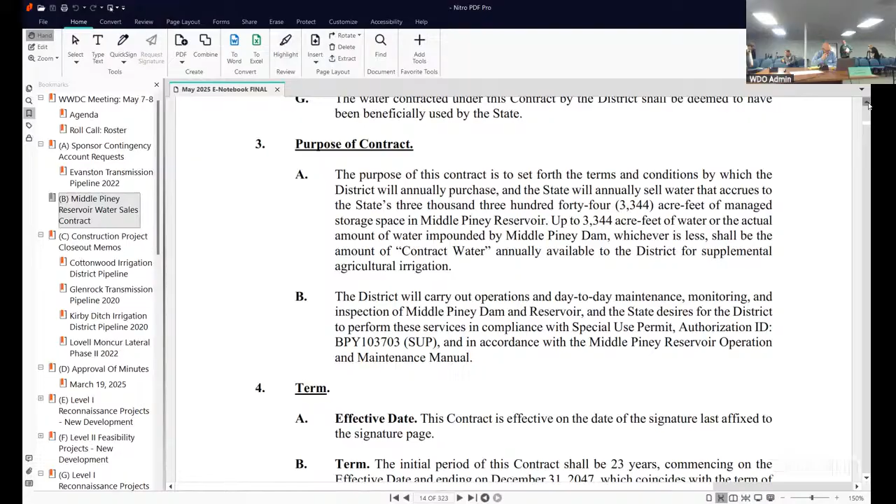I'm on page 2 of the agreement. Again, we're looking to sell 3,344 acre feet, or whatever would be accruing to that active capacity in a given year, since Mother Nature is not always going to fill the reservoir. So they're going to owe us the $10,000 per year regardless of whether it fills completely or it's only 2,000 acre feet.

The term of the contract is going to match the term of the special use permit. They are not in perpetuity—they're there for 30 years max. So that would go to 2047.

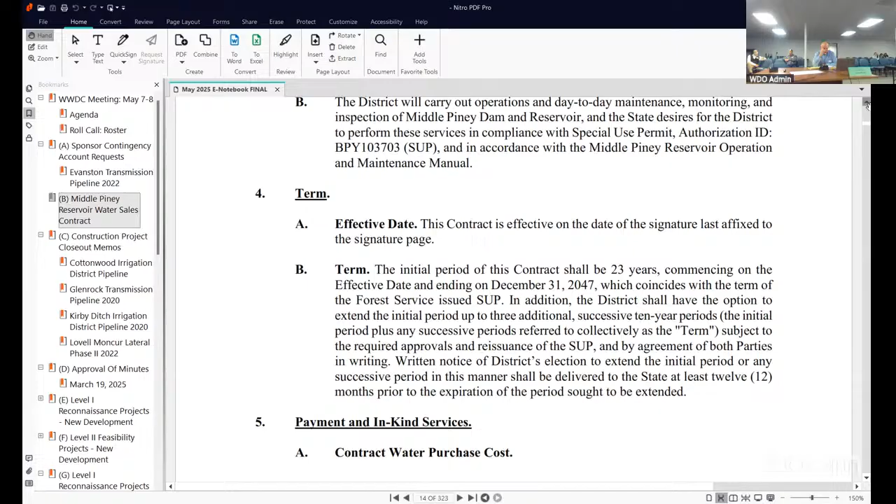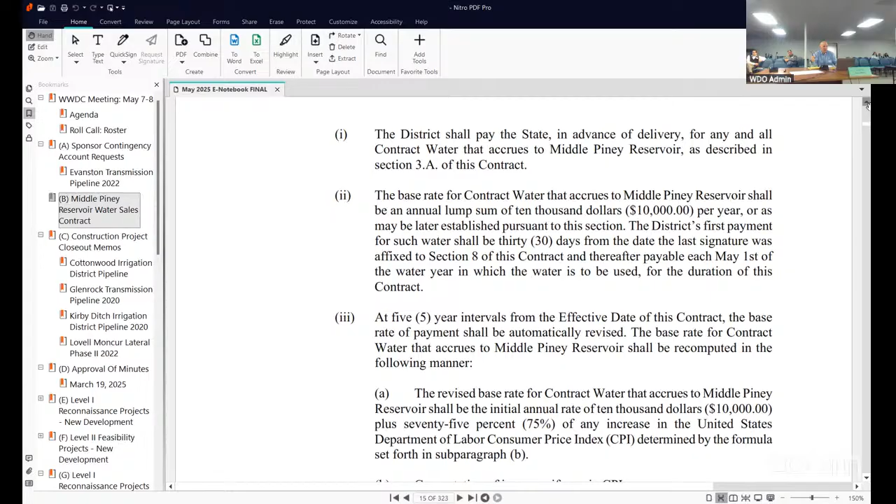And I mentioned the $10,000. There's also an escalator involved. So every 5 years from the effective date, we will look at what the Consumer Price Index was for all, or U.S. city average for all items, basically the month that the contract originally was signed, and then we will look at that same number at the 5-year mark. Basically 3/4 of the difference is what the cost of the water would then go up. We have this same clause in selling water out of High Savery to the Little Snake Water Conservancy District.

For example, the first 5 years it went up, I think, 5.6%. The second 5 years it went up 6.13%. The last 5 years was pretty significantly higher, it was 16%, because of all the inflation that we've seen.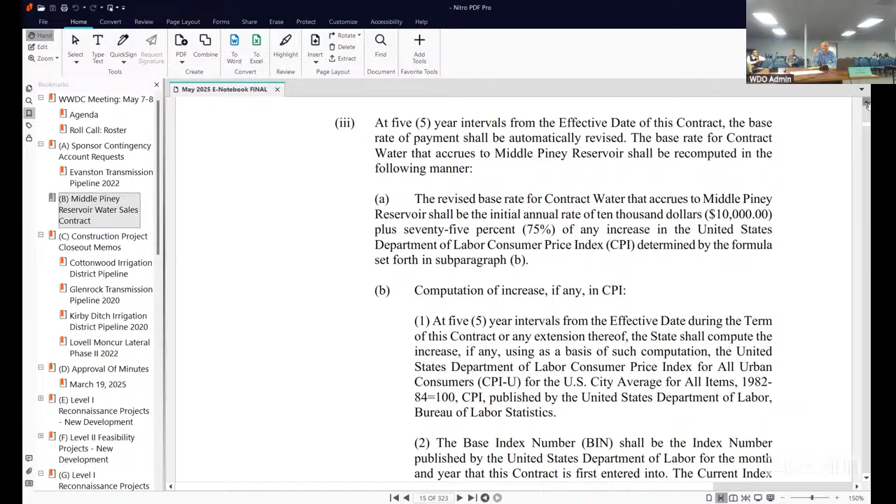I also wanted to point out, not that I would ever anticipate this happening, but because this is somewhat of a subsidized project -- obviously state dollars were used to reconstruct the dam -- we don't want the water to be taken advantage of. What I mean by that is we've got some clauses in here on page 5 that say the water is basically for the express purpose of providing supplemental agricultural irrigation within the district. There shall be no resale of the contract water by the shareholders.

If a shareholder decides they don't need water in a given year, they will relinquish that back to the district. The district would then resell it at the original cost and then compensate the original shareholder for that money. So we're not going to be jacking up the price and trying to sell it for a lot more money to make a windfall off of a state project. So that's in there as well.

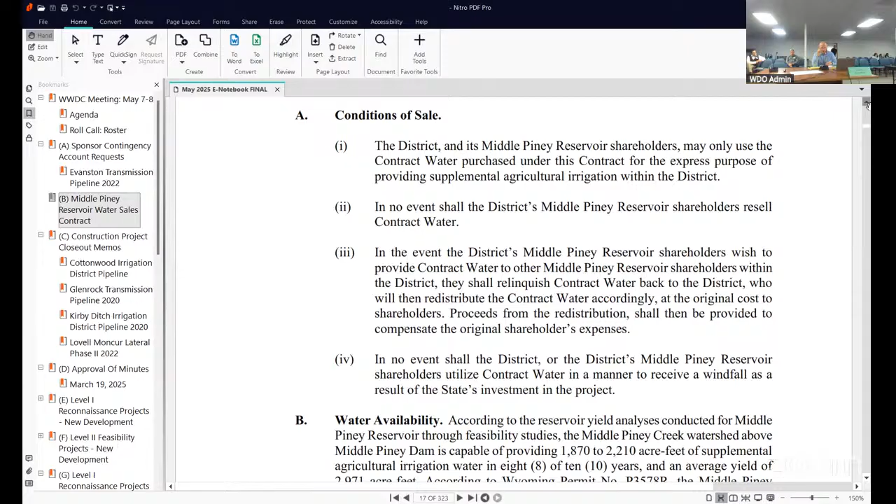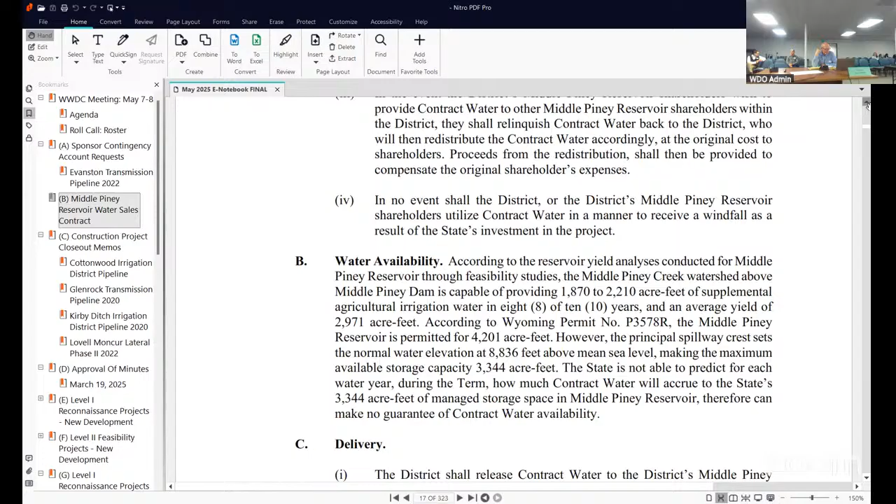And because this is high elevation, we've got in here that on July 10th of every year, we'll determine what water is accumulated to the active space. If there, for some reason, is no water -- let's say there's a safety of dams issue or something -- and they've paid for the water in a given year but we weren't able to store any water, then we would credit that amount, the $10,000 for the first 5 years, to the next year's payment.

And then if for some reason after July 10th we have some issue where we have to evacuate some water -- say there was 3,344 acre feet available on July 10th and we can only give them 1,000 for some reason -- then we would prorate and credit that prorated amount to the next year. But in a typical year, they're going to pay the amount for whatever accumulates to the reservoir.

That pretty much covers it. I would ask if there's any questions for me or for Chad Espenscheid with the Middle Piney Watershed Improvement District.

The only other quick thing I would say is this is a new facility for both our office and for the district, so it's going to take some years to get a better understanding of how it's going to operate, what the expenses might be to operate it. So this is our first cut at this agreement. I wouldn't be surprised, no different than High Savery -- we came back and amended the agreement at one point in time to reflect what we learned over a couple of years on how it would actually operate. So.

Thank you, Director. Any questions?

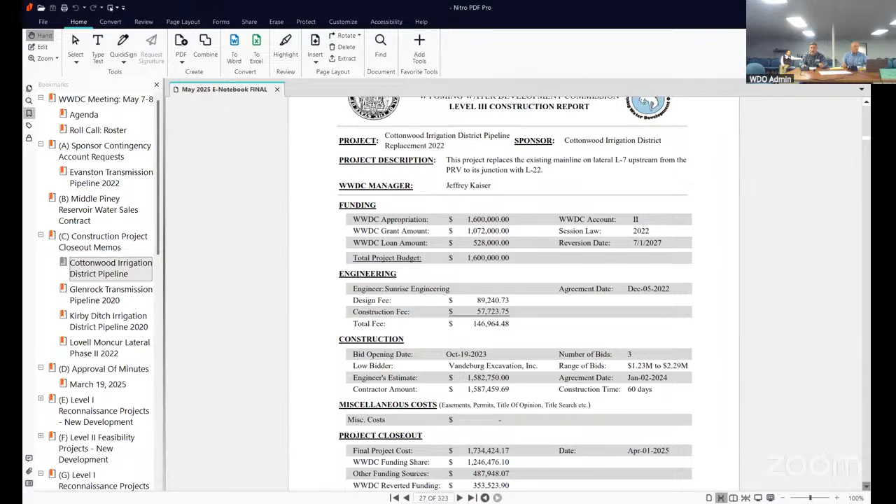So the last item, I think, is construction closeout memos, as we'll discuss tomorrow, I assume, but it's mostly informational. Is that correct? Correct. The closeout memos are informational for the commission. There's no action required on them, so we figured we'd slide them in today on the workshop since there wasn't any action required.

The sponsor also obtained BOR funding. So in the end, we paid 67/33 percent of our share. However, we did not pay 67/33 percent of the entire project because there was also Bureau of Reclamation funds involved.

The engineer for this project was Sunrise Engineering. He completed the engineering within a reasonable budget, coming in at about 9.2% of the project, which is generally pretty reasonable engineering cost.

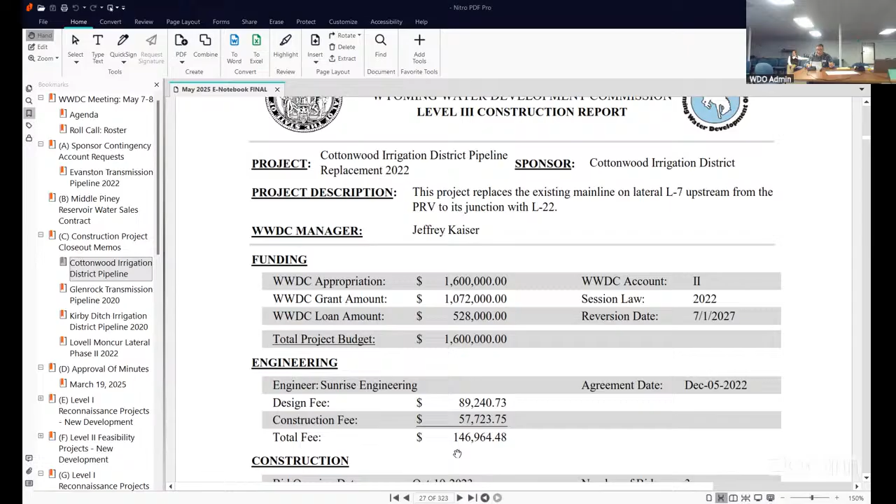Construction was completed by Vandeburg Excavation. We received 3 bids on this project, ranging from $1.2 to $2.3 million for the work. The original bids were slightly under the engineer's estimate, but after final change orders and stuff, came in right about where the engineer's estimate had been originally.

So in the end, the project ended up about 1.7 million, which was slightly over the original budget, but with the BOR funds involved, we will end up reverting a little over $350,000 on this project that will go back into account 2. So any questions on Cottonwood?

Okay, moving on, next project is the Glenrock Transmission Pipeline from 2020, for the town of Glenrock. This replaced an aging ductile iron pipeline with new PVC. This project dates back far enough that I was the original project manager on it. When I moved up to deputy director, it went to Ken Mitchell. When Ken Mitchell left us to go to the military department, I took it back and closed it out.

This project was won a couple years ago. There's excess ARPA funds left over that were kind of raked back by SLIB and given to the governor to redistribute. We had 8 projects that we proposed to the governor as being good projects to use those funds. We received about 23 million through that, which we replaced water development funds with those ARPA funds.

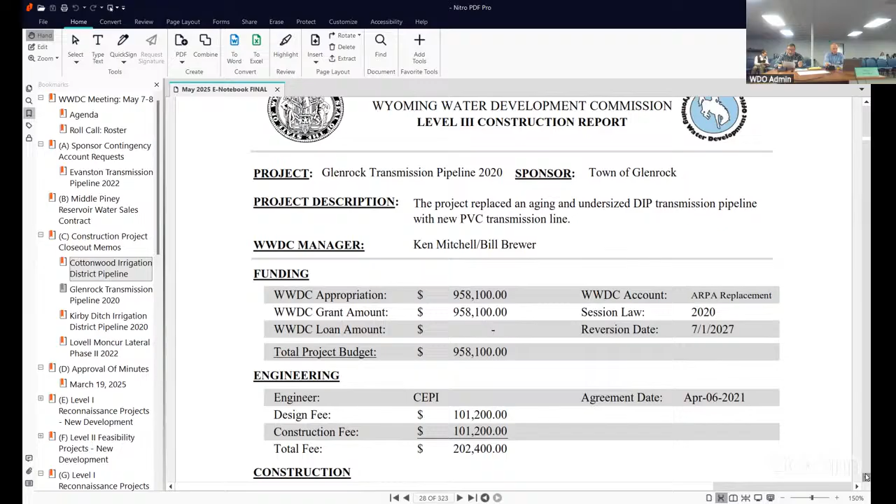So the engineer on this project was CEPI, and the low bidder was Andreen-Hunt Construction. We received 2 bids on this project. The project came in under the engineer's estimate and ultimately would have been under our overall budget.

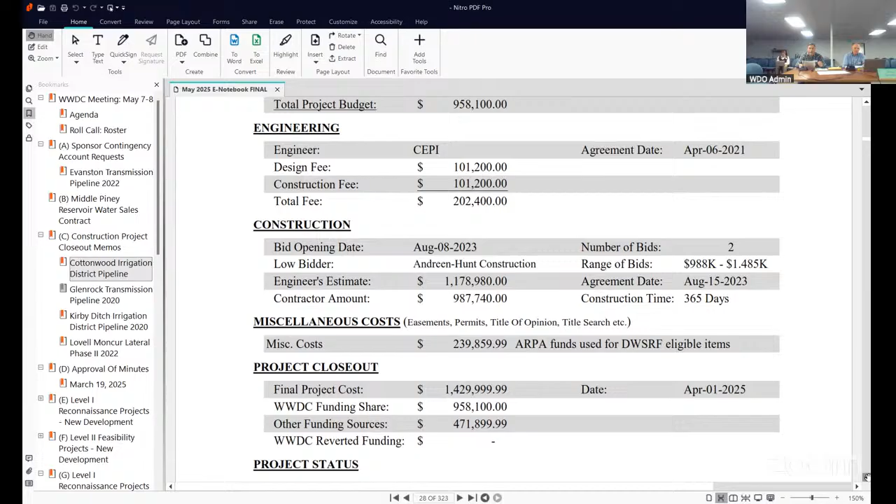However, because these were ARPA funds and we were relatively directed to use them -- otherwise it was going to go back to the federal government -- the original project broke out eligible versus ineligible costs. So we had our normal eligible water development costs. However, the ARPA funds were eligible to be used on anything that SRF considered eligible, which also includes distribution and some treatment, some other things that we normally couldn't pay for.

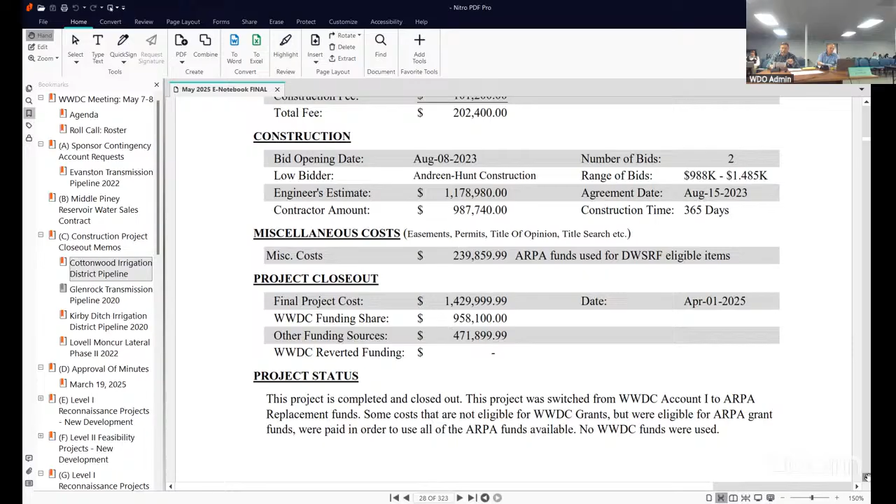However, because they were ARPA funds, we did have those extra funds. Some of those funds were used to cover some of those DWSRF eligible items we normally wouldn't, to use up all the ARPA funds rather than revert those back to the federal government. So in the end, all the money was spent. However, as I said, it was ARPA funds, and all of the water development funds were reverted back to our account. So it's a little more complicated one, but other than that, okay, I'll move on here.

Next project is the Kirby Ditch Irrigation District Pipeline 2020 project. This was a ditch to pipeline project. This ditch runs along a very steep bank, which occasionally collapses into the ditch and plugs it up, and then the ditch overflows into the highway. So this is a very good project for multiple reasons to convert ditch to pipe.

Normally, we're converting ditch to pipe for water loss purposes. In this case, it both works as water loss, and it also means that we're not collapsing this side slope, filling in the canal, and then flooding the roadway when that canal bursts, which sounded like it happened about every 5 years, partially washing out a county road. This was, again, a 67.33% grant loan project.

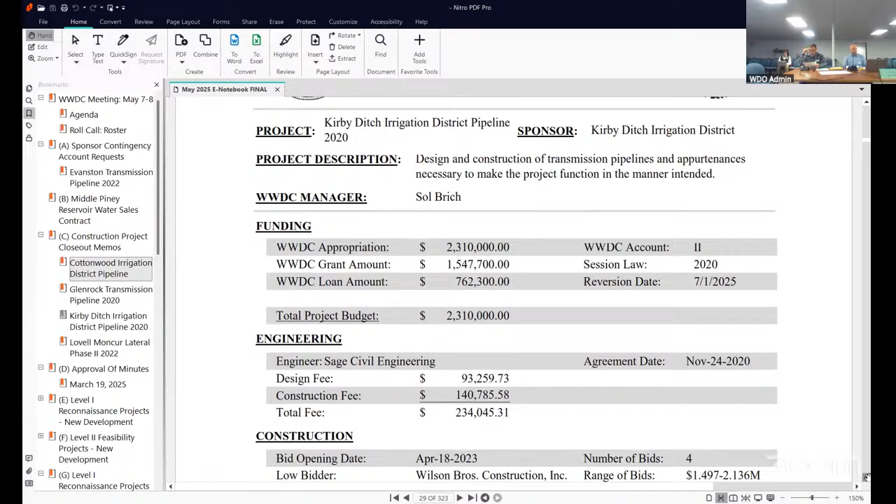Sage Civil Engineering was the engineer on the project. Wilson Brothers Construction was the low bidder. We received 4 bids on this project that ranged from about $1.5 to $2.1 million. The engineer's estimate was a little under $2.1 million. We did end up with 3 change orders throughout this project for slight things. However, we still ended up under the engineer's original estimated budget.

So we will be reverting about $264,000 to account 2. In addition to that, the sponsor was also able to obtain some BOR WaterSmart funds, and therefore, at the end of the project, they paid off their loan. So not only did we revert back some funds, the loan was paid off at the end, so we have all that money back again also. So any questions on this one?

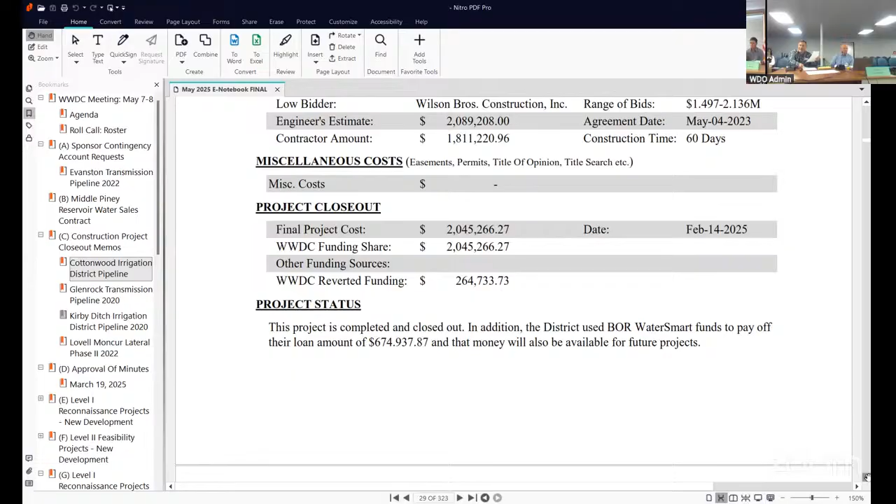Bill, I got a question. What's the total amount being reverted back to the office? I'll say that after I do the last one. I do have a total on the bottom of this one, what we're reverting back. So, okay, if that's okay. So moving on to the last project here.

This is for the Lovell Irrigation District. This is the Lovell Moncur lateral phase 2 project. This converted 9,900 feet of irrigation canal to pipe. Jeff Kaiser was the manager on this project. The original appropriation on this project was $991,000.

This project was a materials-only project. For some of the select water members who may not be familiar with materials only, a lot of these irrigation districts have staff that work all summer keeping their ditches and everything working well. In the winter, those same workers, who are familiar with heavy equipment and keeping ditches open, do ditch rehab, and we cover the cost of the materials. They cover the cost of all the engineering, all the labor, all the equipment. So it's kind of a win-win. We get a cheaper project because we're only paying for the materials, and they get to keep their staff busy during the winter so they don't lay people off and lose them.

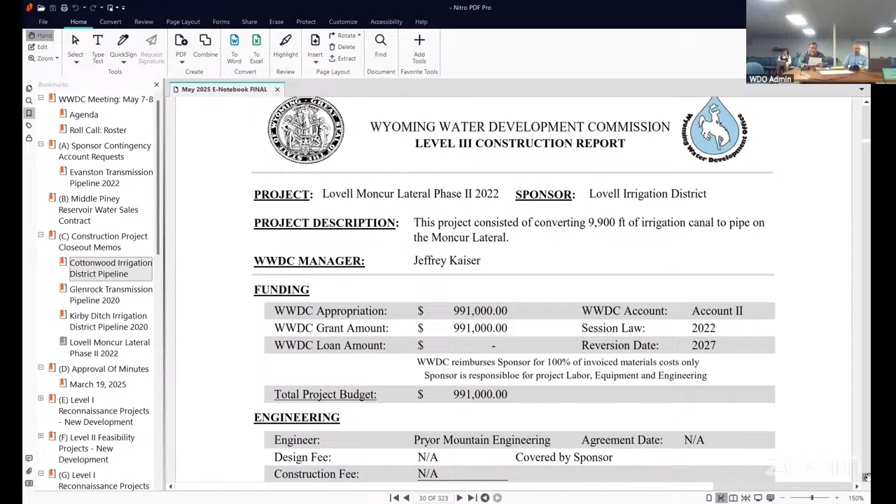So that's the way this project was, we only paid for the materials. The engineer was Pryor Mountain Engineering, and as I said, the sponsor covers all of those engineering costs. The low bidder was Northwest Pipe Fittings, which just supplied the materials for the project. We did only receive one bid, but it was under the engineer's original estimate. There are miscellaneous costs in here, usually related to rebar and concrete. Most of these small districts only have one concrete supplier in the area, so you can't really get bids from them—you get whatever the price is the day you order a truckload of concrete.

But in the end, for this project we will revert about $155,000, and that will also go back to account 2. So before I go to totals, is there any questions on this specific project?

So between these 4 projects, one project was ARPA replacement, an account 1 municipal project. In that case, about $958,000 was reverted to our accounts because we did not use it—we used those ARPA funds instead. For the 3 other projects where we used water development funds, we are looking at reverting about $773,000 back to account 2. Also, one district paid off their loan, another $675,000 paid back. So not counting the ARPA replacement project, we're looking at about $1.45 million reverted back to account 2 that we will be able to redistribute this fall.

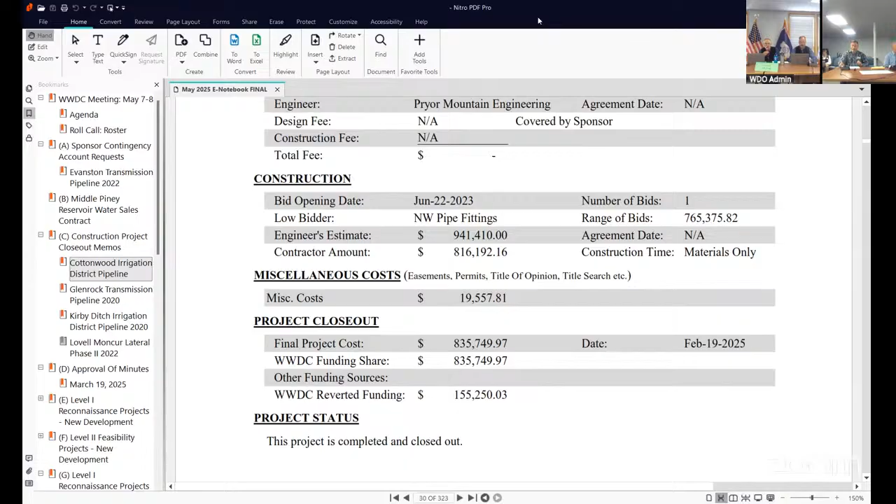Next thing on the agenda is the summer workshop, meeting and tour. Mr. Chairman, I think everybody knows we're going to the Rock Springs area. Commissioner Cott, you want to give an update? Happy to give an update that the tour will be on August 6th—that's a Wednesday, I believe. That will be to the 3 Trona mines, which were the old FMC mine, Tata, and Solvay. We had 4 mines lined up, but one mine could not run tours on that day, so those 3 mines will easily take the 27 people that have registered.

I want to thank Barry and Sarah for their work on this. We've been working on this since September of last year. It's been quite an ordeal trying to have 3 mines involved in one tour, so we look forward to this.

We'll start early that Wednesday morning, probably leaving the Holiday Inn area at 6:15. We have to be at 2 of the mines no later than 7 o'clock, so we need to get there. Transportation will have roughly 9 people going to each mine, so we can easily accommodate that in our personal vehicles. We can work that out as that day comes closer.